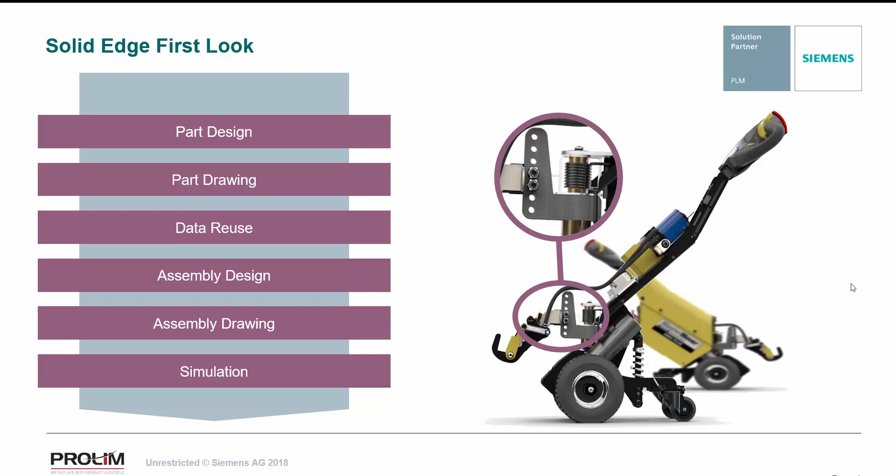First up is part design, and what I want to focus on here is something that's a real differentiator in Solid Edge, and that's synchronous technology. Now, rather than dismissing this just as some sort of buzzword, let me introduce why Siemens created it. The most common type of CAD system available in the marketplace uses what's called history-based modeling because it has many great benefits, such as being dimension-driven. It's so good, in fact, that Solid Edge has been a history-based modeler for about 20 years now and continues to provide this method today. However, we've worked this way for so long that we've learned to ignore some of the not-so-good things, such as having to pre-plan the model.

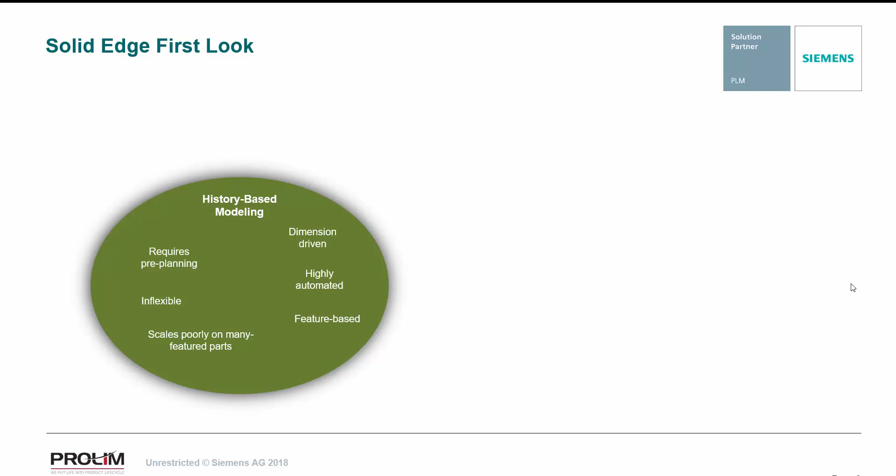Looking for a better way to work, we can turn to direct modeling because this has some great benefits such as direct interaction with the model, but there are downsides to this method as well, such as being featureless, so not very organized. So how about taking the best of both worlds, but leaving out the downsides? Well, this is why Siemens created synchronous technology, with unique items such as 3D driving dimensions and face relationships to really synchronize those worlds. In fact, the technology is so unique to Siemens that the last time I checked, there are about 8 patents granted, with a further 23 pending. Obviously, it's much more exciting to see this in action, so let's do just that.

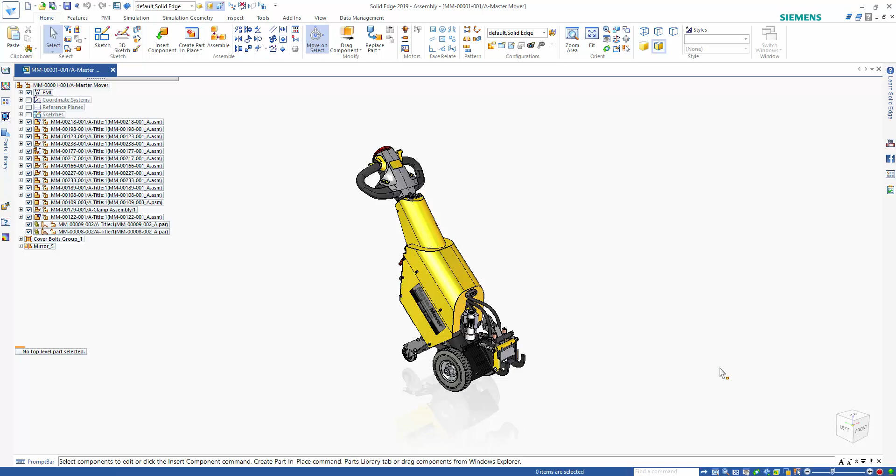So here we see the Master Mover assembly, and we're going to start by designing our part using a top-down modeling approach. To do that, we're going to narrow down the parts that we can see here using a display configuration, and we're going to edit into one of these sub-assemblies so that we can design the part in the context of that assembly. What we're going to do is simply define where we want to start that component by using some of the existing geometry from the components in the subassembly.

And then using the Solid Edge data management, we can come in and automatically assign things like a document number to the new part file. We can also go in and browse and choose where we want to save this part, in our case out to our working directory. We can add other relevant information, things like titles or notes or whatever else we might need. Simply hit save, and now we've started our new part file.

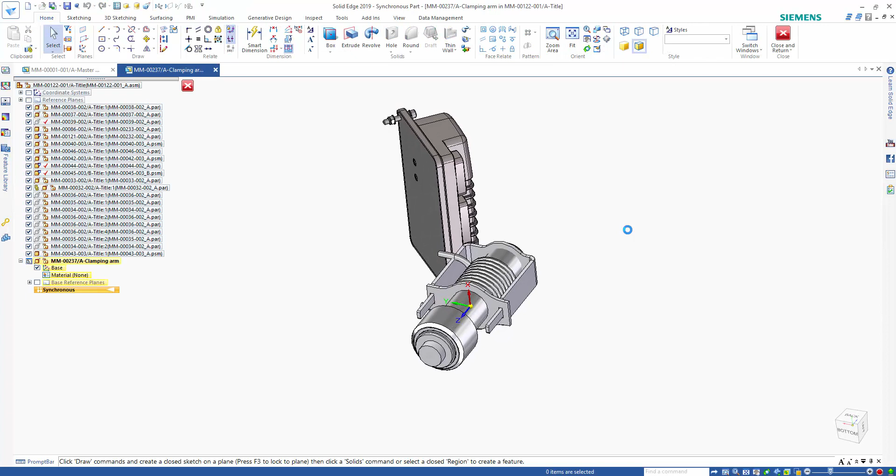Again, we're designing this in the context of the assembly, so to start to create some of our features, we're simply going to reuse geometry from the surrounding or adjacent components. In this case, we'll reuse this face geometry here and simply extrude that out, and now we've got our part started. We didn't have to go in and create any sort of sketches to begin with, anything like that.

We just go do it and start to create the geometry. Next thing what we might want to do is start to maybe cut away some of the geometry. Again, I'm just going to start directly interacting with the model using synchronous and our steering wheel to push those faces through the model to create a cutout. Also, if we maybe want to add some geometry, we can select a face here, pull that face away from the model, and key in a specific distance if we need to.

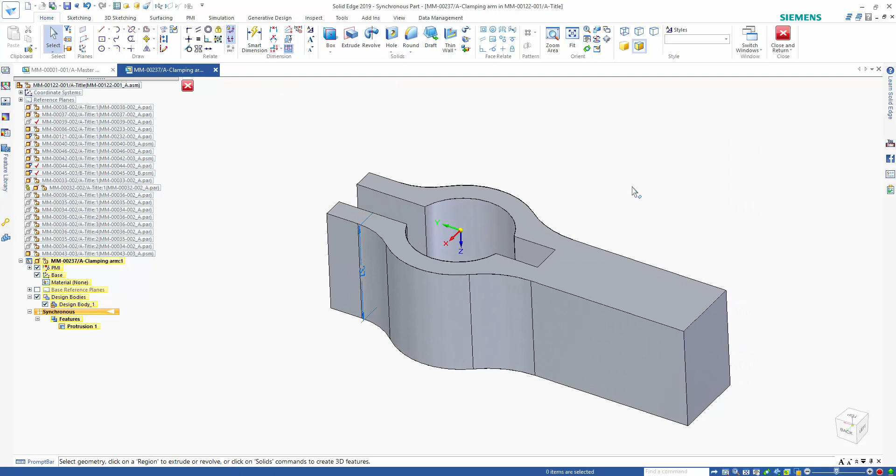We also have the capability, if we do want to sketch something, I can come in here and maybe simply just draw a line somewhere across the top of this face, which divides that face into separate regions that I can come in and select, and then simply push or pull, and based on the direction I move my cursor, Solid Edge will automatically add or remove that geometry for me.

I want to go up a set distance here, and I don't actually have to type this calculation outside of Solid Edge. I can do it right here in the value box, something like 150 millimeters minus that existing 37 millimeters of geometry we already have to end up with our part here.

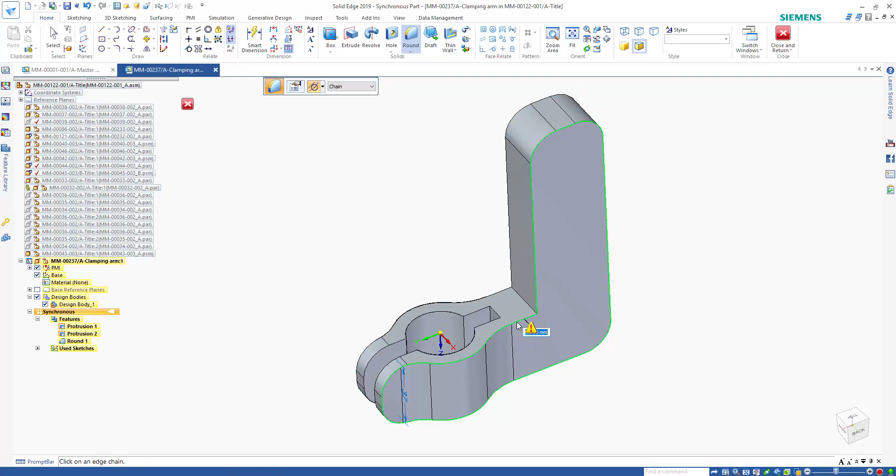Next thing we want to do is add some round features to some of the edges on the model to start to kind of finish this off a little bit. Notice how powerful this is. We can simply add the rounded features through the model, and we have a lot of other options that we can go through here to quickly add rounds to the other faces, and just like that, we've rounded off the model.

Next, what we'll do is directly interact with the model to add some constraints and dimensions to it. I don't have to go back to any sort of sketch or anything like that. I can come in here and directly interact with the model, add this dimension onto it, and actually drive the model. This is one of the benefits of that direct modeling comparison that we saw earlier, is being able to directly interact with the geometry.

So here I can add this dimension and then drive it just by scrolling my scroll wheel up and down to change that value to whatever we want. In our case, maybe we want to set it to around 45 millimeters, and then we can fully lock down that dimension so that it doesn't change on its own. We do have to go back in and change it if we want the value to be different.

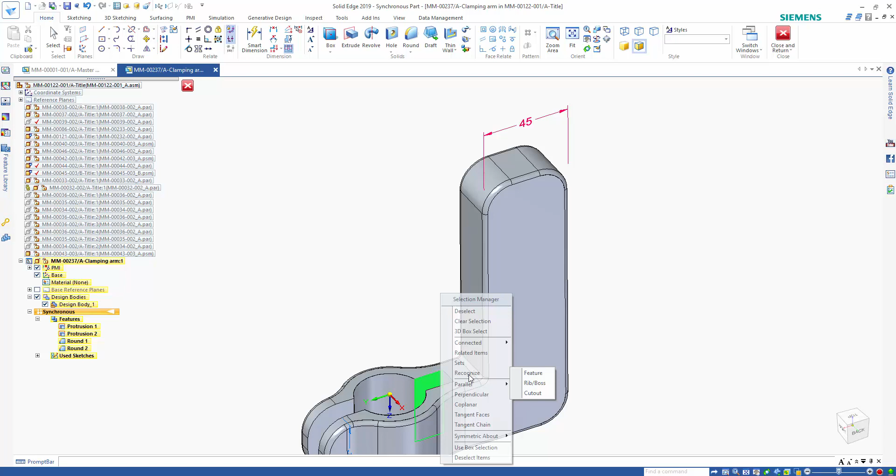Other things we can do, we can actually recognize features that don't truly exist in the history tree in the Pathfinder. I can come in and do things like recognize features or ribs or bosses or cutouts. And the great thing about this selection manager option that I'm showing you here is it also works on imported type geometry. So I could bring in a part from another CAD package, recognize some of the features on there, and then delete them or edit them or move them, whatever you need to do.

In our case, we're going to recognize this cutout, and we're going to actually copy that geometry and use it over again to create a cutout somewhere else in the model. We're going to do this by using the steering wheel and simply hold down Control to make a copy. We'll rotate that around about 180 degrees, and now we have a cutout through the other side of the model here. If we need to make any sort of adjustments, we can.

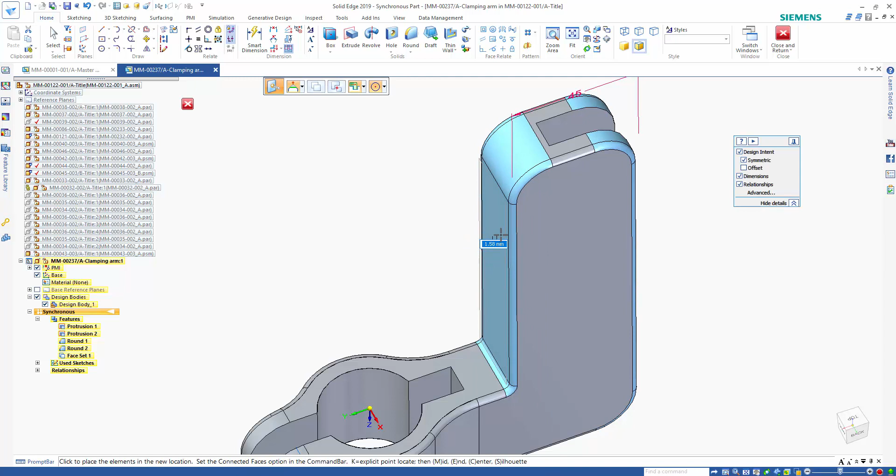Maybe we want to shorten that up a little bit. I can simply grab a face, and again, using the steering wheel, push or pull that to move the geometry. We also have options where we can add relationships to the geometry as well. Similar to how you would add a sketching relationship to your 2D geometry, we can add relationships here directly onto the 3D geometry. In this case, we want to offset those two faces a set distance away from each other. That way, if we come in and move one of the faces like this, they stay a set distance away, and this whole feature moves as one piece of geometry.

To continue on with our model here, we're going to add some dimensions to it. So we'll go back in and use our Smart Dimension tool here to add things like radius values or diameters. This diameter value, we want to round it off exactly to 34 millimeters, so easy enough to type that in. We can also go back in and change our dimension to add tolerances, class fits, make it a reference dimension, any of that type of information that we need pretty quickly and easily. In this case, we'll just add a couple tolerance dimensions to that.

Continuing on with our smart dimension, we can dimension off the center point of our round in the middle of the part to the end of the model. Easily again push or pull that value to make a change. In our case, we're going to go about 40, and we'll do the same thing to the right side of our model, and drive that value out to 34.

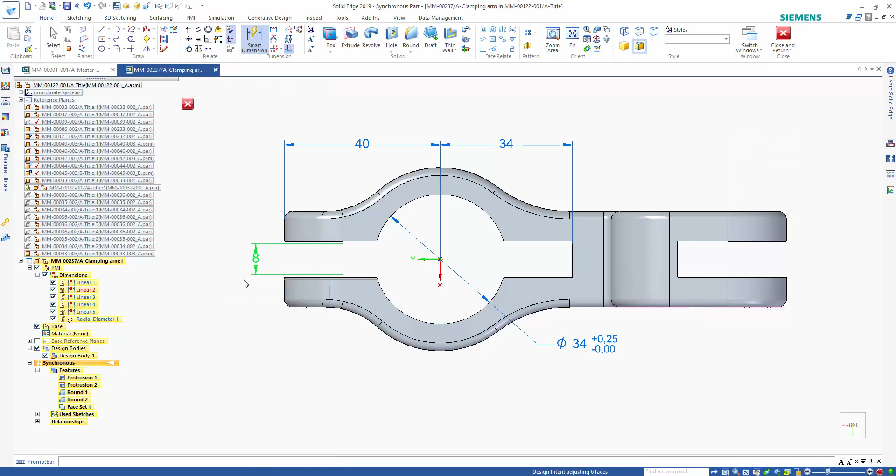Last thing I want to do with the dimensions is dimension the width of our part. So the cool thing about this, you notice when I start to drive this, is the design intent is automatically figured out here. What our original goal was to maintain the width of the cutout all the way through the model. And Solid Edge did that for us automatically. I didn't have to add any sort of relationships or information into a sketch to get this to work. I simply added one dimension, and Solid Edge figured out that all the faces are coplanar and symmetric and should move together. I can simply key in the value that I want, and Solid Edge does the rest for me.

We're going to add some mounting holes to the part as well. So we'll go up and run our hole command. The great thing about the hole command is all the wonderful options that we have here inside of the options dialog. We can go in and create basically any sort of hole that you would need: simple, threaded, counterbore, countersink. And with each subtype of these holes we also have all the different standards. So I can create any sort of counterbore ANSI or ISO hole that I would need. All of these are standard, but if you do need to make any sort of changes, you can easily come in here, customize any of the values, dimensions, thread sizes, whatever you need to do.

I already have a hole set up ahead of time here, just a simple M10 through clearance hole that we'll create down here in the bottom right hand corner of the part. Since I already have the hole selected, I can easily start our pattern command then and create a rectangular pattern up here through the model. We'll go ahead and just switch that option over so we can evenly space those holes out 20 millimeters away from each other.

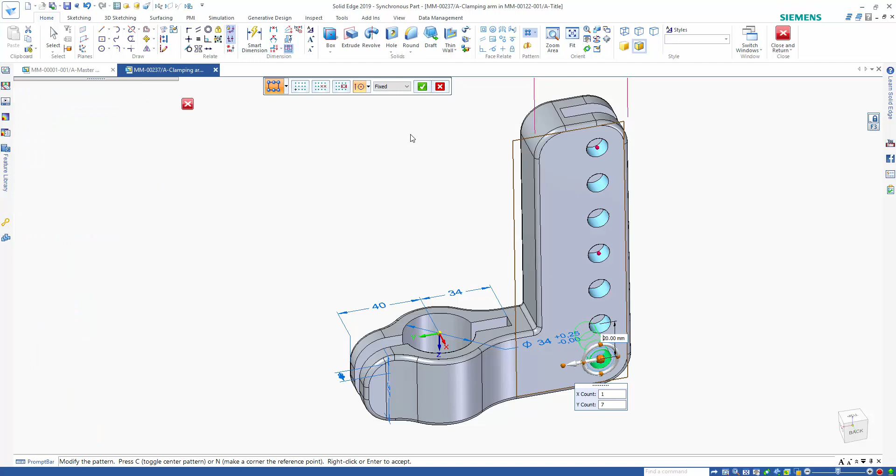Last thing we want to do here to actually edit the model is make sort of a drastic change. And if you're in a history-based or ordered environment, this would be pretty difficult to do. In synchronous, simple enough as just coming in here and fence selecting the geometry we want to edit, placing the steering wheel in an appropriate location to make this sort of edit. In our case, we want to rotate and change the angle.

So I want to place it in the center point of the hole, and just like this, I can easily rotate and change the angle of the right half of our part here. And again, imagine going back in and trying to edit the sketches for this feature, for the holes and the patterns and so on, and how much work that might take to make this sort of edit. Synchronous, couple clicks and I'm done.

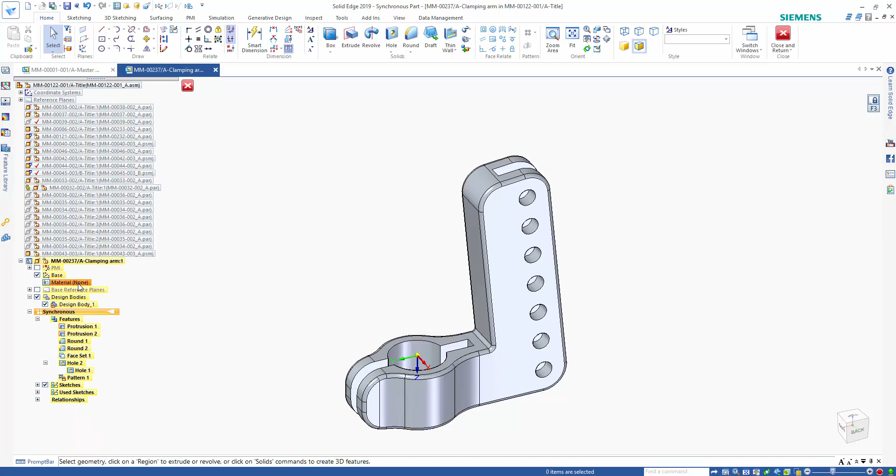So now that we have our design almost finalized, we can go in and start to apply things like material. So I can go into our material table here and I can browse out. We have a large library of provided materials, but you can easily go in and add your own, customize them to your needs. You can go in here and add any sort of properties that you want, anything for simulation, things like yield stress, specific heat, whatever applies to your materials and your models that you're creating. In this case, we're just going to grab an aluminum material here and apply it to the model.

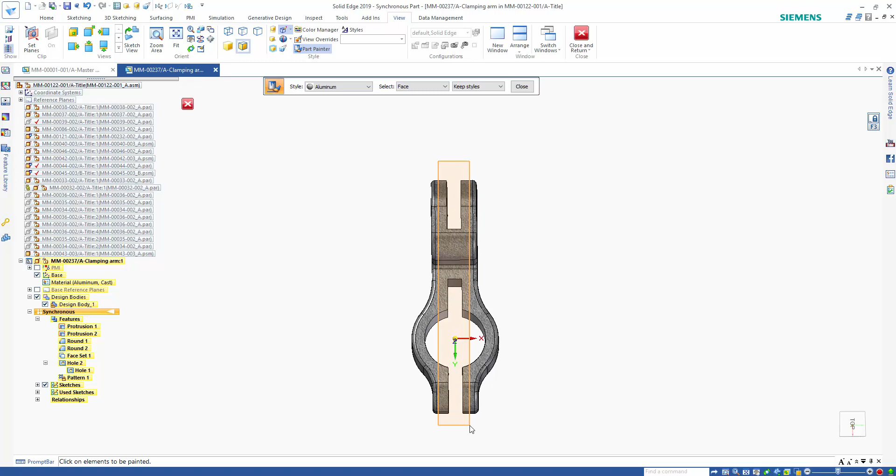And then if we need to, maybe we want to represent some of the faces as a machined face instead of the cast material look. So I'm going to come in here and paint some of these with just an aluminum texture so that it's a nice shiny machine finish instead of that cast look that all the other faces have. We can either select individual faces, or Solid Edge will also recognize features such as our hole, or we can come in here and select our pattern to paint that off as well.

So what we just saw there was how synchronous technology can drive the model with dimensions, and more importantly that there are 3D dimensions directly on the model. Models also scale well, as in they don't get slower the larger they get, an issue with history-based modelers. In addition, synchronous technology does provide a list of features for easy edits and organization, but not a fragile, interlinked web like you get in a history-based modeler.

Synchronous technology will automatically maintain the inherent design intent of the model, but allows us to change our intent on the fly. We saw that we can also directly interact with the model by pushing and pulling faces. This also makes editing synchronous models very flexible, allowing you to have those light bulb moments and make changes at any time without your CAD system limiting you.

To summarize, we saw the best of both worlds modeling, the best of history-based and direct modeling methods, that's synchronous technology. The robust engine behind all of this is Parasolid. This is so good, in fact, that it's used by many other CAD systems on the market. However, what you might not know is that it's owned by Siemens. But we keep the best bits for our own products. Synchronous technology is exclusive to Siemens software.

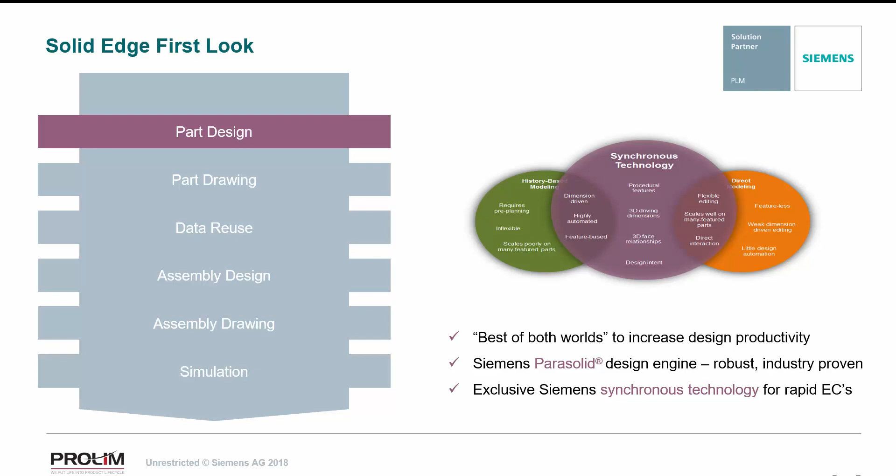Next up is creating a drawing of the part. We'll add a variety of views to clearly communicate our design, retrieve some dimensions directly from the model, and finally add further dimensions and annotations to get it production ready. We can go ahead and save our part first, and then what we're going to do is take the part over into what's known as a quick sheet template.

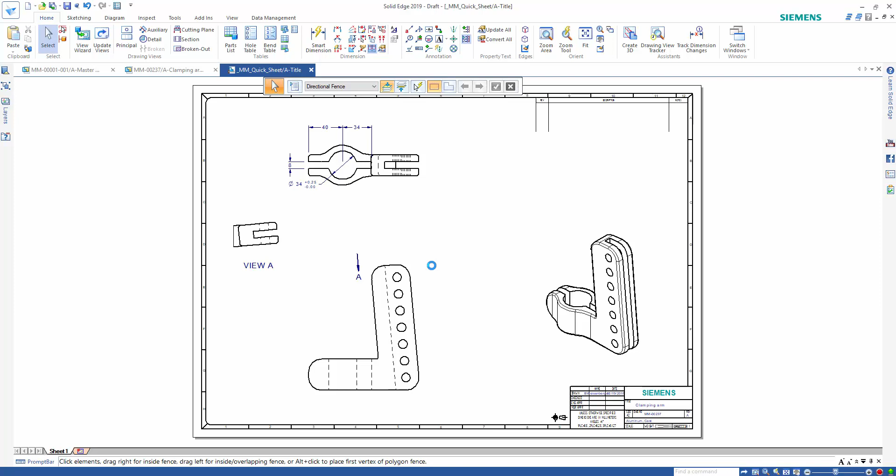What this quick sheet template allows us to do is take any existing part file, bring that into a drafting template, and quickly communicate some different views here that are set up ahead of time. Again, any part file could be brought in and we would get something like a front view, isometric view. We can see an auxiliary view on the side here, and also automatically retrieve some of that manufacturing information that we need. Since we spent the time placing these dimensions on the part file, why waste time recreating those here in the drawing when we can easily retrieve them and bring them over?

If we need to, we can come in here and add some more annotations and information. Things like center marks can quickly be communicated on the model. If we need to add center marks, maybe at an offset angle, we can also go in and use something called a dimension axis to select multiple holes and again, maybe slightly change the alignment if they're not perfectly vertical.

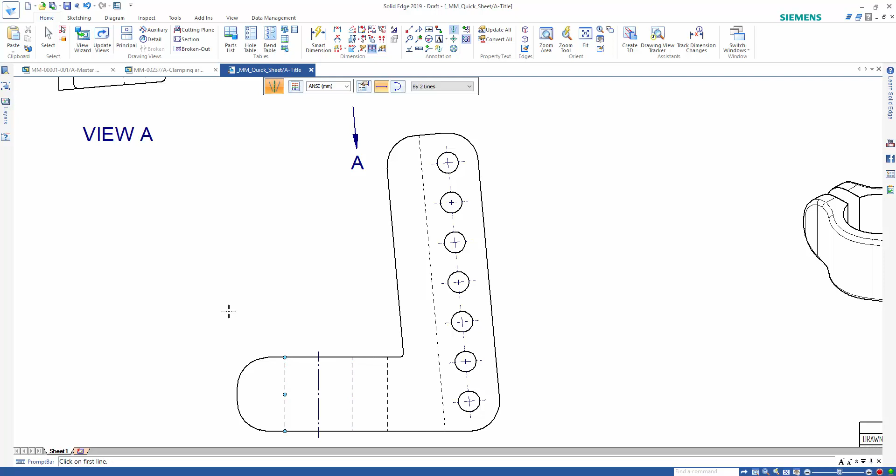We can also add things like center lines a couple different ways. In our case, we'll do by two lines. Quickly select these two lines here to place a center line. Maybe we want to add one to the auxiliary view as well. Now the nice thing about the center lines is they are associative to the views, so that if the views change or the geometry changes, the center line will update and change as well.

If we come back down here to the front view, we can add some more information, add some dimensions here at the drafting level if we need to as well. Using the Smart Dimension command, we can go in and add things like radius values pretty easily. We can select an individual line to get a length, or we can select multiple lines and get a distance. Also, if we select multiple lines and hit A on the keyboard, we can get an angle measurement.

These same dimensions can also be communicated over on something like an isometric view, if that's easier for the shop floor, for instance, to manufacture this model in. Another dimensioning tool that we have is distance between. This is really useful to create stacked or chained dimensions. So I can simply go on and select multiple elements. To get those stacked or chained, there'll be an alignment set together that I can easily adjust and move both dimensions just by dragging one of them.

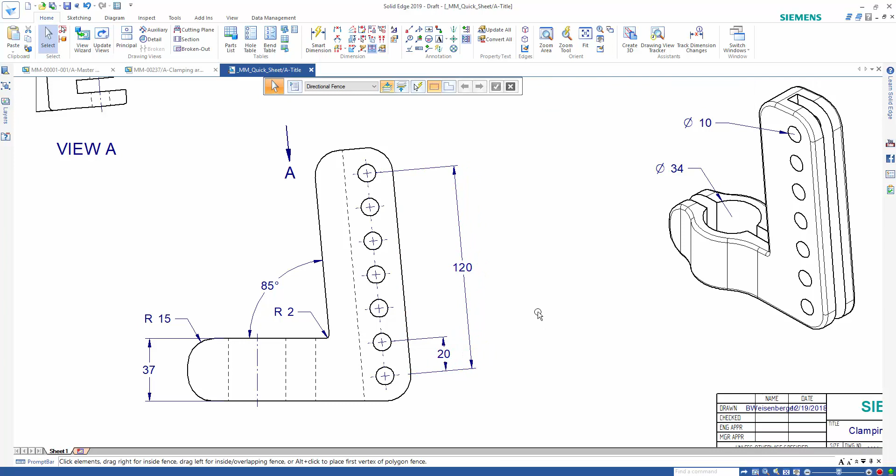Other types of annotations that we can create are things like callouts. In this case, we're going to add a hole callout, which will automatically pull specific information from the different types of holes that you attach that callout to. In this case, just a simple hole, and it gives us the through information there.

Some of the other GD&T type operations that we can apply to our model, things like feature control frames, or if we need to, we can also add datums to the model, and we can add a datum down here to a flat edge, datum A, or we can come up here and if we need to, create a datum B and add that even to a rounded or a cylindrical type edge.

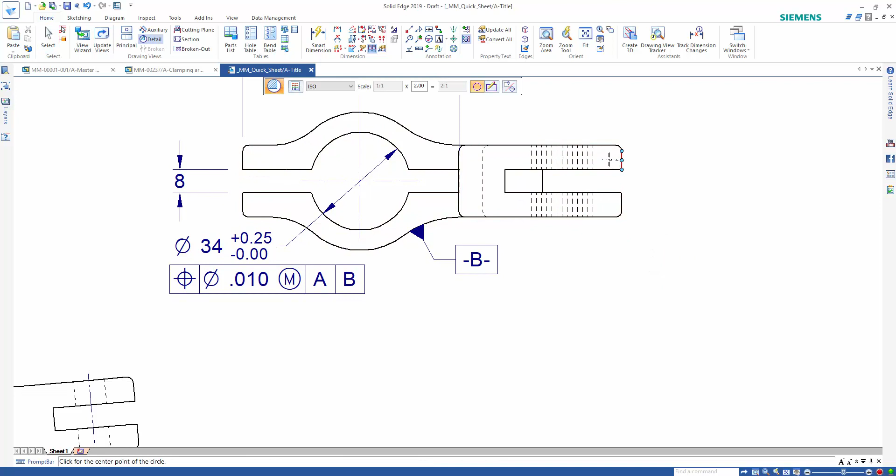We can also add other types of views such as detail views. These are simple to apply to your model. The scale can easily be adjusted here separately from any of the other views on your drawing. Here we have a detail view, obviously, that we can then, if we need to, drag around and place at a different location, which is kind of fun to do, see that live update of moving that detail view around. And of course, you have the capability to go in and add dimensions to the detail view as well without worrying about the scaling factor messing up the true size of those dimensions.

Finally, what we want to do is add a broken out section view to this model as well. This is kind of a unique, cool operation that we can do here. I can come in on one of our specific views to create a profile that I want to create for my section view here, my broken out view. And then using any of the other views on my sheet, I can choose how far through the model I want to cut that broken out section view, and then simply apply it to something like the isometric view here, again, to communicate some more information inside of our model.

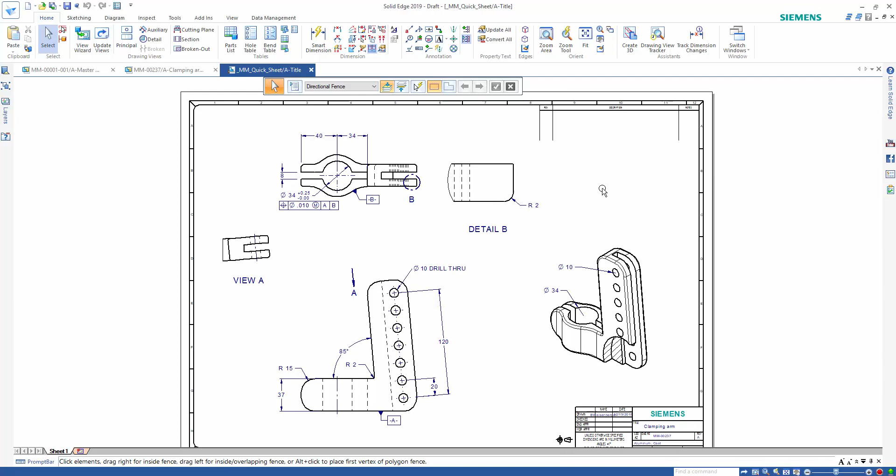The last thing we want to do then is make sure we save the drawing as well. So if we go up and hit save, our data management that we have here will automatically assign the document number and revision matching that of the part file that the drawing is created from. We can validate that to make sure that we have no issues with it, and then simply hit save.

So to summarize, we saw fast view creation, automated production ready dimensions direct from our 3D part with the ability to create further annotations tweaked to our requirements. And all of this is clear and accurate to the standards that we choose in Solid Edge, for example, ISO, ANSI, etc.

Next thing we're going to look at is some data reuse. We're going to open up an existing DWG drawing inside of Solid Edge. We'll create a 3D model from that 2D geometry. We're also going to then edit that geometry to ensure that it fits inside of our assembly with our existing Solid Edge components. So let's take a look.

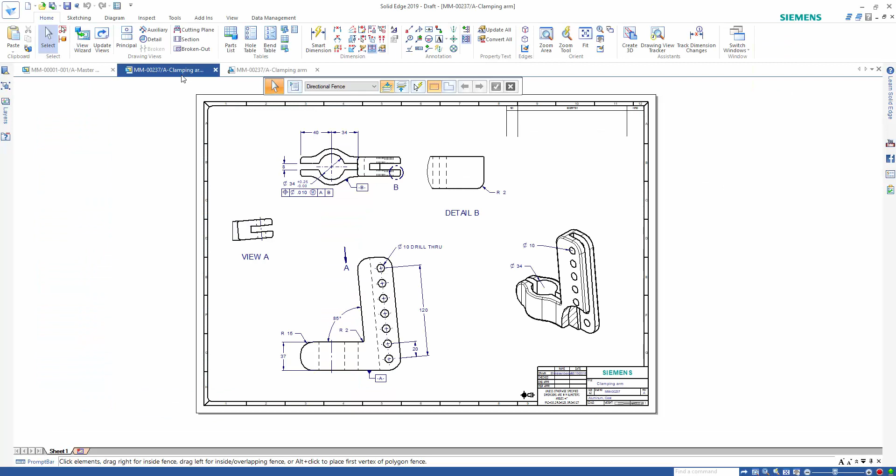To start with, we can switch back over to our subassembly where we created our part file and go ahead and close out of that part and head back to the subassembly. Now we can notice here at the subassembly level that we're missing a component here to hold this top part in place. We actually have that part though created as a DWG that we may have used in the past. We want to reuse that geometry so we don't have to waste time redesigning a new part file. So what we'll do in this case is go up and open the DWG.

To find that, we're going to use our data management here to search for a file. We can search on all different types of properties and criteria. In our case, we're going to search for a specific file type. We're going to look for a DWG file. We can easily search that and we return the result down here of a DWG. I can easily double click that then to open it, and I'm just going to choose an ISO draft template here to pull that up inside of.

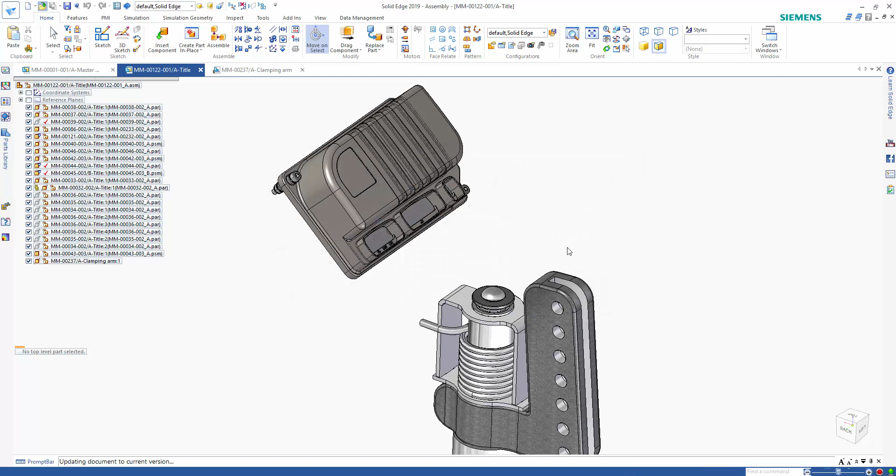When we open up our DWG files, obviously we can see the border and all of our views and our dimensions. So what we actually do is support layers coming from AutoCAD into Solid Edge. If we need to, we can come over and do things like hide some of the layers. We can also set up how we want fonts and colors to transition from the DWG into Solid Edge and how we want those mapped across.

Now what we're going to do to get this into 3D is run a command called Create 3D. We'll simply choose the part file we want to add the geometry to, select our front view and our right view. You do have the option to select as many views as you want.

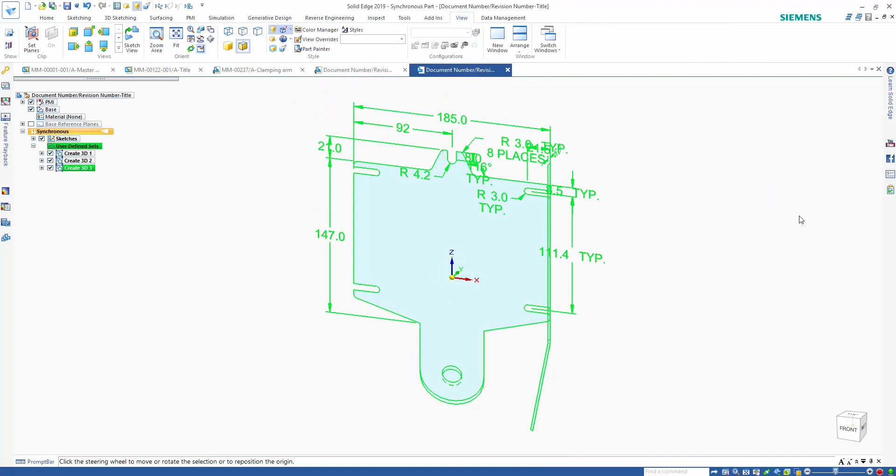In our case, we're going to set a fold line where we'll fold these two views on top of each other. When we hit finish, you'll see what I mean. Our two views are brought into a part file folded on top of one another. All of our dimensions came across as well. Right now they're green dimensions because they're not really attached to any sort of 3D geometry, but as we start to create a part here, you'll notice those dimensions will become attached.

Now, the great thing about bringing these sketches into the synchronous environment is I don't have to know how far something's extruded. I can simply select one of my sketches and grab a key point on one of the other sketches. Again, you'll notice some of the dimensions start to turn blue, which means they're attaching to the 3D geometry. I can go in with my extrude command and select even an open profile here and start to extrude that out or cut that through the model if I want to continue with our part here.

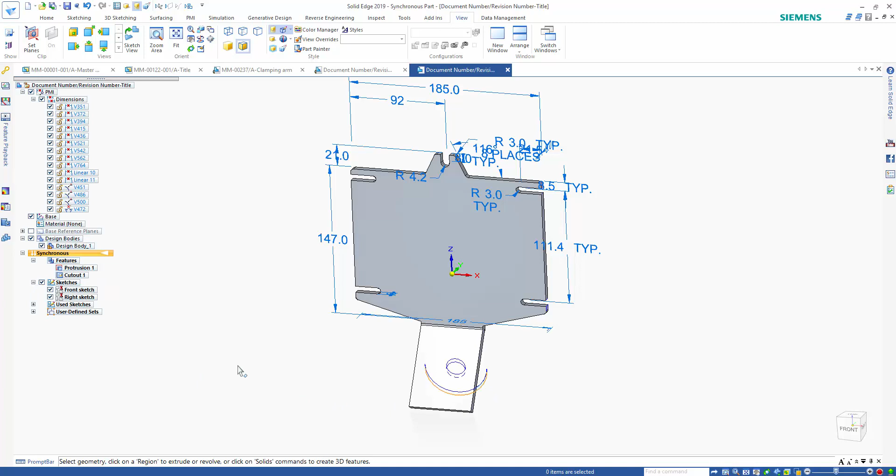Now, just to go along with this, there are some additional sketches at the bottom, but we don't necessarily need those. We can actually come in and delete all the sketches from the model and just go in and add some of our own features to finish this off. In our case, what we'll add are a couple round features down here on the bottom of the model. We'll add a couple 30mm rounds down here. We can also use some of our primitive shape commands like the cylinder command to create a cylindrical cutout without really having to create a sketch that's going to drive this. Just create a cutout through the model.

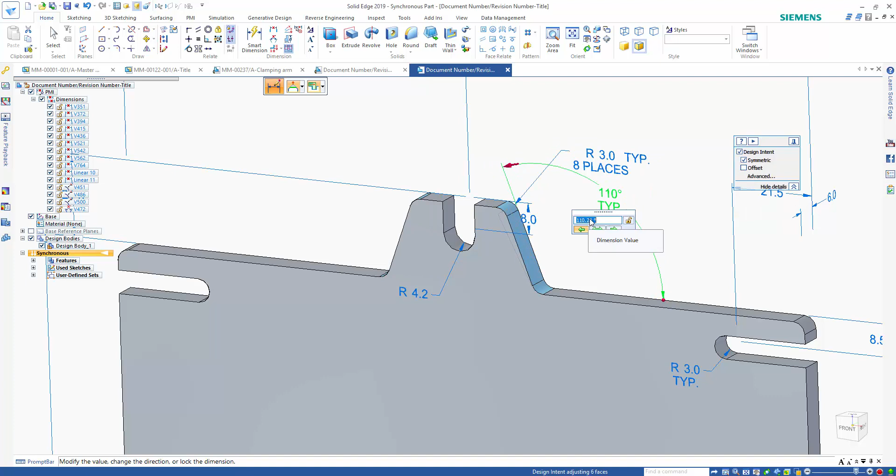Now, I talked about some of the dimensions attaching to the 3D model. Well, let's look at what happens if we make a change to one of those dimensions. I can select one of them and start to drive them using my scroll wheel up or down if I want to make a change, or I could select even an angle dimension here and symmetrically adjust that because of design intent, picking up both sides of the model. So all of that was automatically created for us when we brought those drawing views from the 2D over into the 3D.

Now we want to go ahead and apply material to the model, so I can simply right click here and maybe we just add steel to this for right now. And this looks a lot like a sheet metal part here. But all we see in our Pathfinder right now are part features and we're in the part environment. So we actually want to make this sheet metal, which is easy to do inside of Solid Edge. I can simply switch into the sheet metal environment and use one of our tools to transition the model from a part model to sheet metal. If you look at the Pathfinder, you watch our protrusions turn into a tab and a flange.

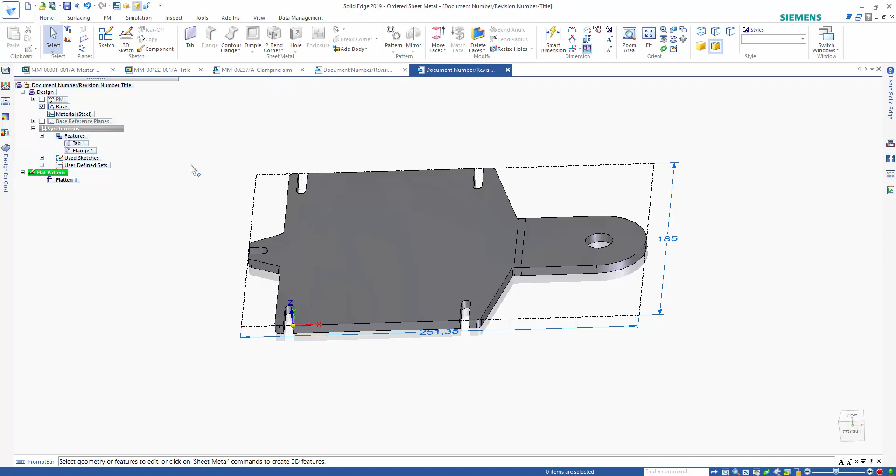And just to do a couple things to prove to you that this is sheet metal, I can select our bend and actually edit the bend radius. Maybe we make that 6mm instead of 3, or I could actually flatten this model, select the face I want to have oriented up in my flat pattern, and we end up with the flat of the model, which also shows us our cut size, sheet size that we need to create this. So pretty quick and easy to convert this from 2D to a part to a sheet metal document.

Now, what I'm going to do is go ahead and actually save this model. Again, our built-in data management will allow us to automatically assign a document number to it. We're going to save this in our working folder. All we have to do is just add a title to the file and then save it.

Something new that was added here in the latest version of Solid Edge is an option to apply costs to sheet metal files. So we have a design for cost module that's included with Solid Edge that allows us to come in here and calculate things like the number of bends, cut lengths, stamping features, and associate a cost with each one of those operations.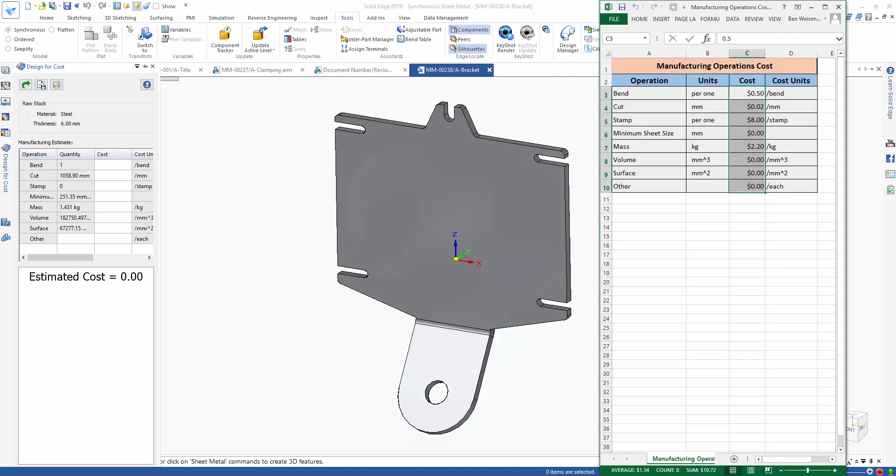In our case, we have an Excel sheet set up for us already that maybe was provided to us by sales or some other engineers that know how much our operations cost. So what we can do is actually copy out those costs here and paste them inside of Solid Edge, and we get a cost estimate of how much it'll cost to create this part file. So we see a rough estimate about $24, $25 to create this.

We're going to come back and look at this cost in just a little bit once we make some more changes to the part. But for now, let's go ahead and close out of the part file to see how it actually fits and functions inside of our subassembly. So we can close down the part and the drawing. We don't need that anymore. We'll head back over to the subassembly and we're going to insert that component. We can go grab it from our library.

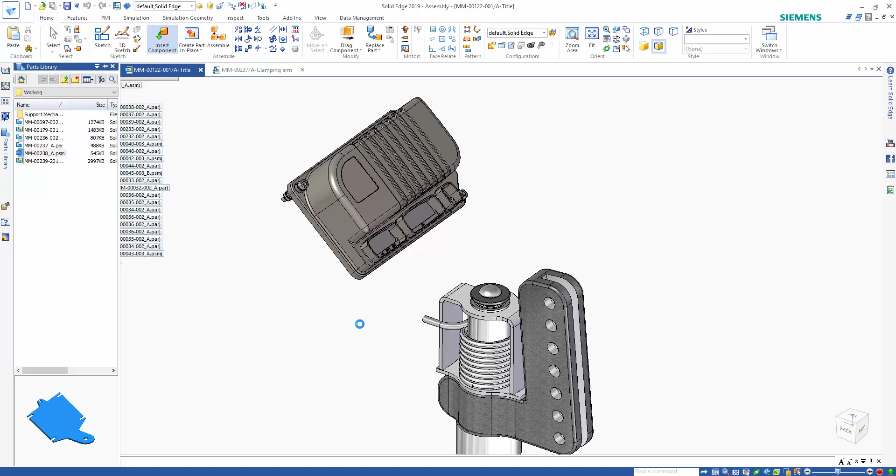If we need to, we can use the preview to reorient it to get it closer to how we want to bring it into the assembly. Simply drag and drop and add some assembly relationships. The default part positioning tool here is our flash fit tool. Makes it really easy to grab any flat planar surfaces or cylindrical surfaces and automatically apply things like mates and axial aligns. Just like that, we've got our part positioned and we can obviously see it doesn't quite match up.

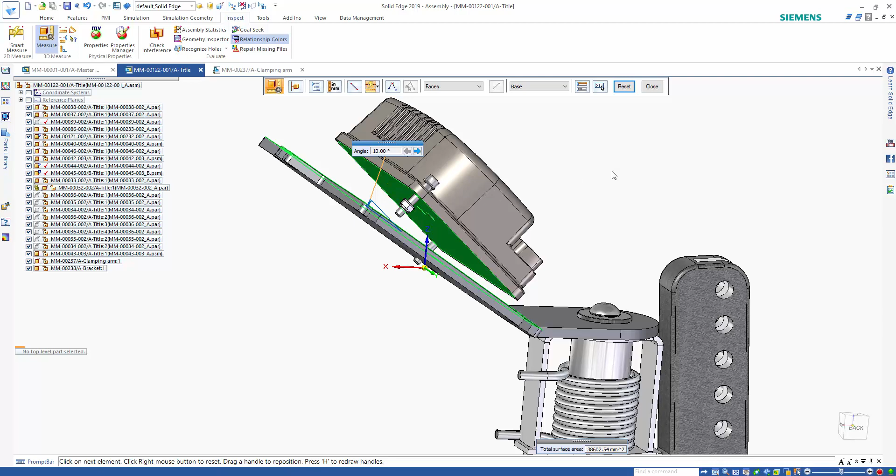Our angle is not correct. Some of our slots don't match up with the bolts or screws and our other components, so we need to make some changes. First thing we want to do is measure the angle between these two parts so we know how much we need to edit the part by. So I can go in under our Inspect tab and take a measurement here between these two faces, and we can see that returns an angle of 10 degrees. So we need to rotate our sheet metal part 10 degrees up.

So what I can do is actually just select that part and do an edit in place here, edit it in the context of the assembly. And what I'm going to do is simply fence select the faces that I need to drag or rotate or edit, and place my steering wheel in an appropriate location then to make this rotation. So that's the power of synchronous, simply just being able to grab the things I want to change, place the steering wheel in an appropriate location, and then simply start to rotate that and make my change. So I'm going to rotate that up about 10 degrees.

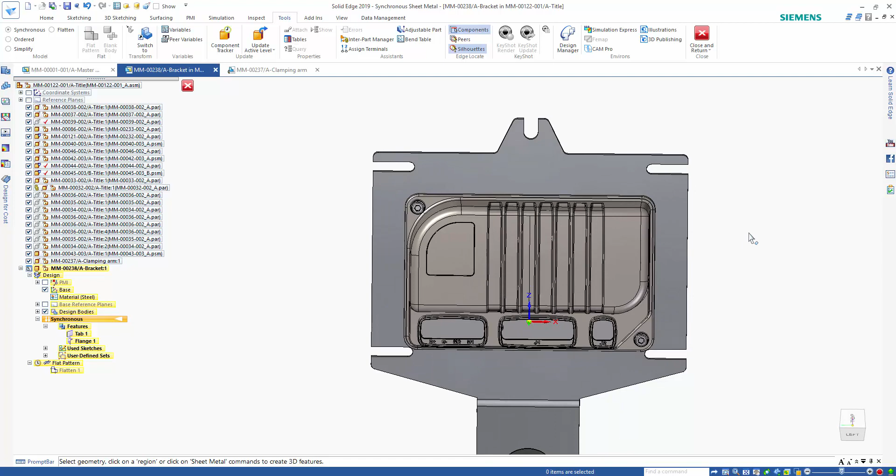And if we turn on those background components, we can see that that actually works. It matches perfectly there. So we're good to go on that edit. The other edits that we need to make are to the slot features on the side of the part. So what I can do here is, again, simply fence select the geometry I want to change, place the steering wheel in an appropriate location, and start to make an edit. You'll notice our design intent is moving all 4 slots at the same time. It's trying to keep them aligned and symmetric, which is what we want.

So in our case, I'm going to just bring that up, center it up on my bolt here, and those bottom slots are good to go. To edit the top, I'm going to fence select actually the entire part to bring the whole top surface down. We'll locate our steering wheel and again bring that geometry down, and just like that we've made those changes that we needed to get the part to fit our assembly.

So pretty cool that we can bring in a 2D AutoCAD drawing, bring it into 3D Solid Edge, make it a part file. If we decide then it should really be sheet metal, not a problem. Quickly transition that over and then make some edits on the fly at the assembly level to get this to fit into our model.

Last couple things we maybe want to do is add another feature. Maybe we need to add some strengthening features like a gusset in here. So this is a procedural feature where we can go in and add these parameters that are going to drive it, things like the depth and the width. I already have one set up ahead of time, so I'll simply select that one. And then we just choose where we want to place it. I want to drop it right here on the middle of this bend.

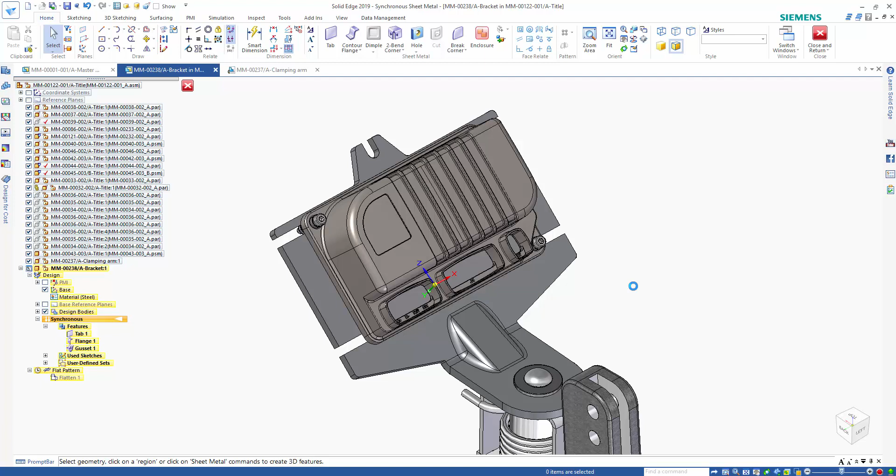So we talked about that design for cost, and we saw it was about $24, $25 before. Now we've made some changes, added some additional features. So if we take a look at our cost now, we're up to about $32, $33. So pretty cool that it'll continually update and recalculate our costs of our features as we add them into our sheet metal design here.

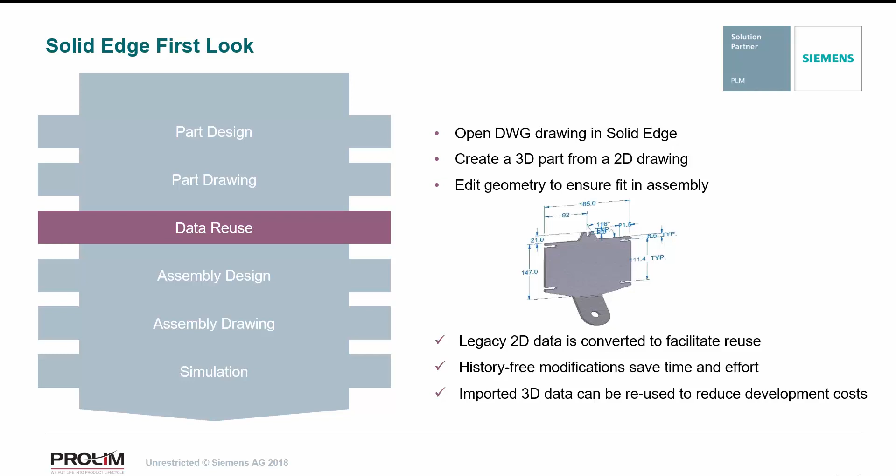So again, just to recap, we saw how we can bring in that legacy 2D data and convert it to easily reuse it. We can use synchronous and our history-free type modifications to save time and effort. We do also have the capability to import 3D data and do something similar. We can easily go in and reuse it, make changes to it as if it was designed right inside of Solid Edge to help us reduce some of our development costs.

Next thing we want to look at is some assembly design. We want to start to assemble these components that we've created with things like fasteners, nuts, and bolts. We also want to look at placing some additional components and eliminate any interference between the parts that we might have as well. So let's take a look.

So we've finished with our bracket design. We can go ahead and switch back over to our top level assembly. So we'll simply close out of the part file and that subassembly, head back over into the top level assembly here. And we're going to go in and add some assembly relationships, similar to what we did with the bracket on top there. So we'll go in through our assemble command, and again, using our flash fit option, we'll simply line up some of these holes between the components.

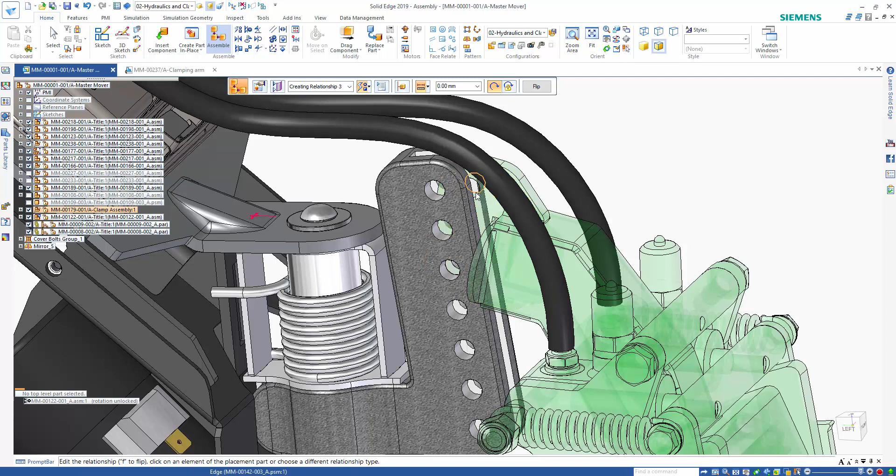And you'll notice as we start to add these relationships, the tubes on top actually adjust. They're a fixed length tube, but the path will automatically move and adjust to fit where the components are currently placed. And so pretty nice option there that you have available with adjustable components and adjustable tubes.

So we have our components assembled here. What we want to do is add some bolts or fasteners between those components to hold them together, obviously. Now, I don't want to go in and take some measurements. How deep are those holes? What are the size of the holes? So what we have is an option called the fastener system that can actually do some of that work for us automatically.

So what I'm going to do is open up the fastener system, and this is going to use our built-in standard parts database where I can go in and select individual holes or multiple holes that I want to place bolts inside of. We'll choose how far through the part we want those bolts to go, and it'll simply bring up our standard parts database.

Inside of this database, it's going to limit our options down to the specific bolts that will fit inside of these holes. So here I can see in a DIN standard, I have these specific types of bolts that will fit inside of here. This will also allow me to go browse out ANSI standard, ISO standard, whatever it may be, to again find those specific bolts that will fit in my assembly.

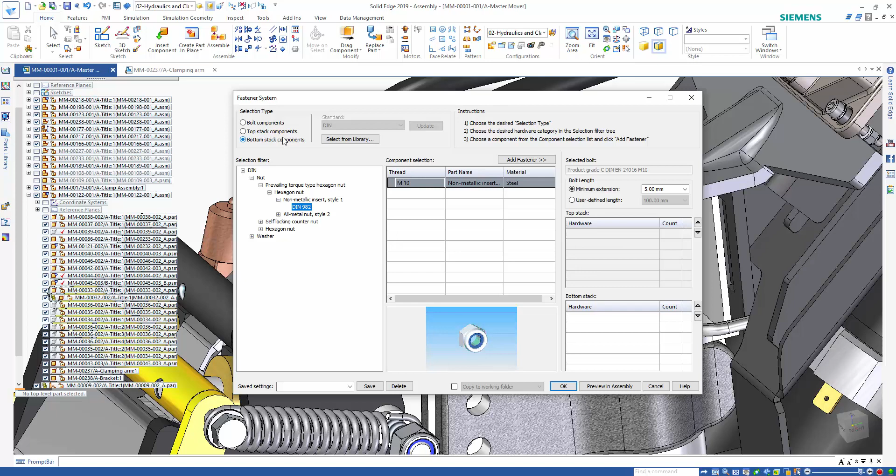Once you select a specific bolt, you also have the options to go in and pick things like top stacks if you want a washer, or bottom stacks if you want a nut, whatever you may need. I already have one created here for us and saved, so we'll just go ahead and grab that, place it inside of our assembly. And there we go, just like that, we place those two bolts with the nuts right inside of our assembly, speeding up that process for us.

Next thing we want to do is look at another one of my favorite commands in here called duplicate component. So if we switch our display configuration, we can see we have these different bolts placed inside of the assembly. What we want to do first is I want to put a washer on one of them. So I'm going to head over into my parts library, go into our working directory, and we have a washer here that I'm going to place inside of the assembly.

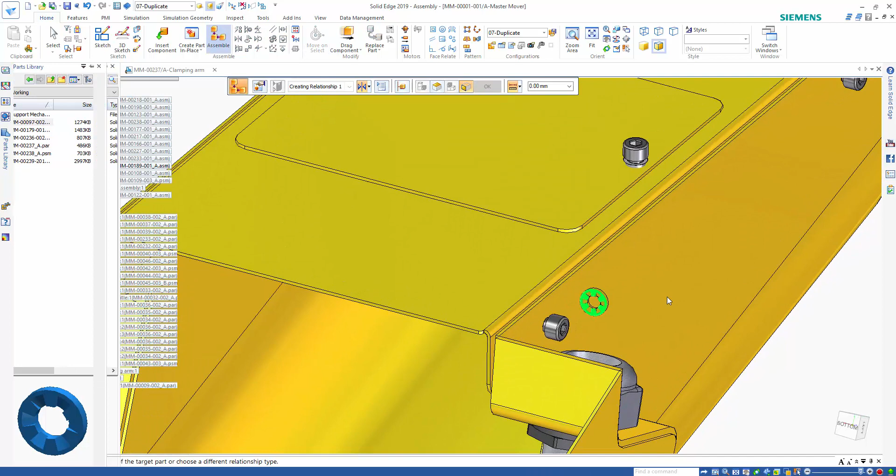Now, what you'll notice actually about this washer is one of the faces is already highlighted. This is another option that you have available inside of Solid Edge called Capture Fit, where we can tell Solid Edge to intelligently remember the relationships that have been applied to the components the first time that they were placed.

That way, in the future, if you use them again, it really speeds up the process of placing them. All I have to do is select the faces I want to align it with, and just like that, it's been placed inside of my assembly.

Now what I want to do is take that washer and add it to all of the other bolts in the assembly. So I can select my component and come up here and run the duplicate component command. It's a pattern type operation, so it lives up here in the pattern group. And what I'm going to say is I want to duplicate that washer from this bolt to any other bolt that I select. Or using this button up here on the command bar, I can say find all matching occurrences, and just like that, we've added a washer to all of these other bolts. So that's another option you have to help speed up the assembly process.

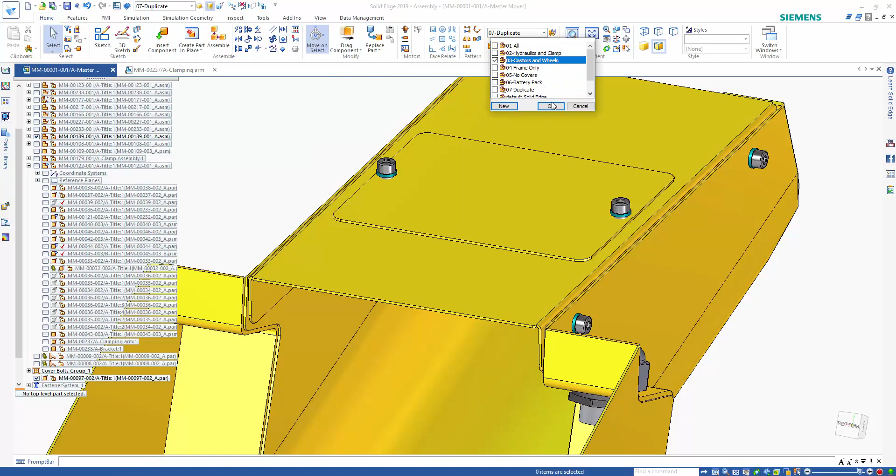Next we want to change our display configuration again, and over here in the back we can see a subassembly of a caster. We only have one placed inside of here right now. So what we're going to do is edit inside of our subassembly. We're going to simply fence select the geometry that has already been placed in here. We want to use that over again. I don't want to have to bring in all these bolts, bring in all these components one at a time. I simply just want to reuse them.

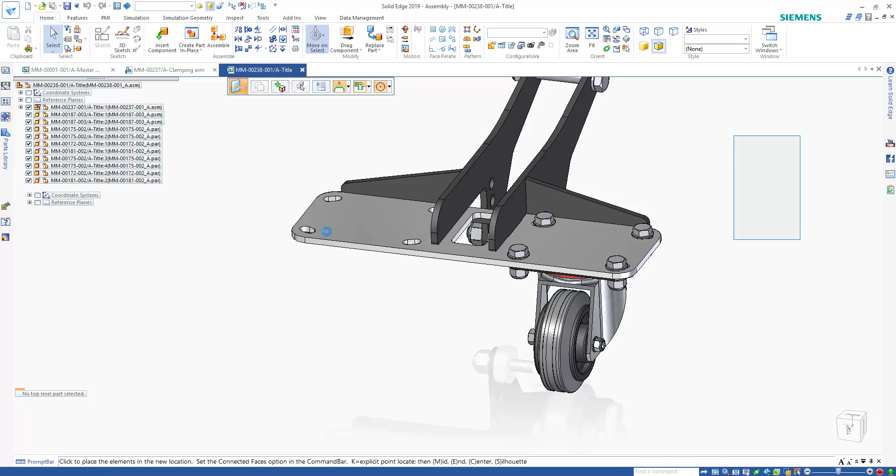So what I'm going to do is place my steering wheel somewhere specific here, maybe on the center of the bolt, and simply do a copy by holding down Control on my keyboard, select the steering wheel, and I'm going to copy those components over here to the left, and we're going to say redefine those relationships to this plate in the middle of the subassembly, and just like that, it's been copied over and we're good to go.

Just to prove to you that it did copy those assembly relationships, if I select one of those components and we look down here to the bottom of the Pathfinder, we can see that it did create those specific assembly relationships. So again, another time-saving operation that you have available to you. You can easily copy and move components to somewhere else in the assembly. So we'll go ahead and save those changes and close down that subassembly.

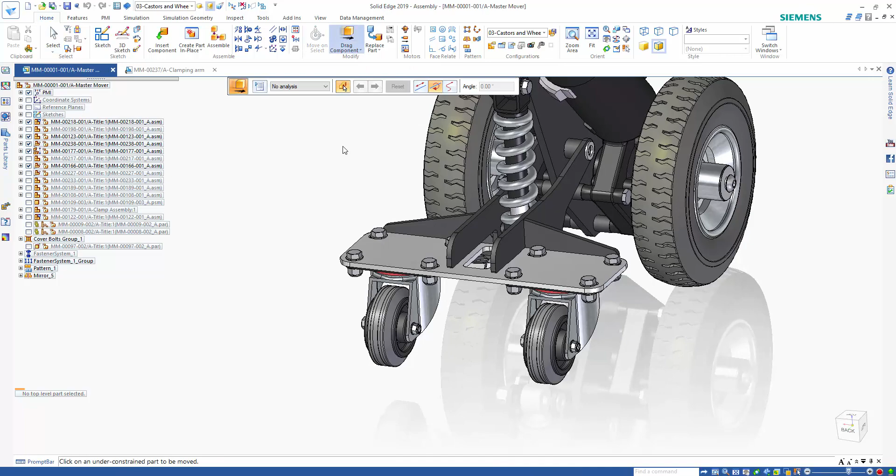Now you'll notice on this assembly we also have this spring up here, this shock. So what we can actually do is show some analysis, some movement of how this assembly will go up and down. So I can grab this component and drag it, and as I let go, you'll notice the spring automatically updates. It's an adjustable part. So as the length of that hydraulic shock changes, the length of the spring will change automatically as well.

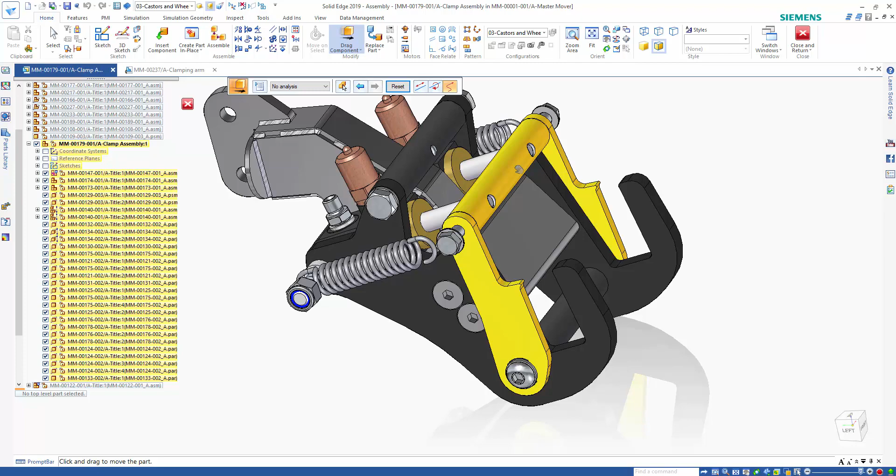We actually have another place over here in our top level assembly where we want to see something similar. So I'm going to do a show all on the entire assembly, and up here towards the front we have some similar motion that we want to take a look at. So what I'm going to do is edit inside of this subassembly. And we'll do the same thing. We'll do a drag component. We want to drag this yellow bar here off to the side. Again, you'll notice those springs update as that part moves.

Now, as we drag this all the way out, you may notice we might have a little bit of interference here between the yellow component and the black ones. So what I'm going to do is run an inspection operation here to check our interference. And I want to check the interference that this yellow part might have with any other part in the assembly. And just like that, it highlights the interference between those two parts. So we need to make a little bit of a change here to get rid of that interference.

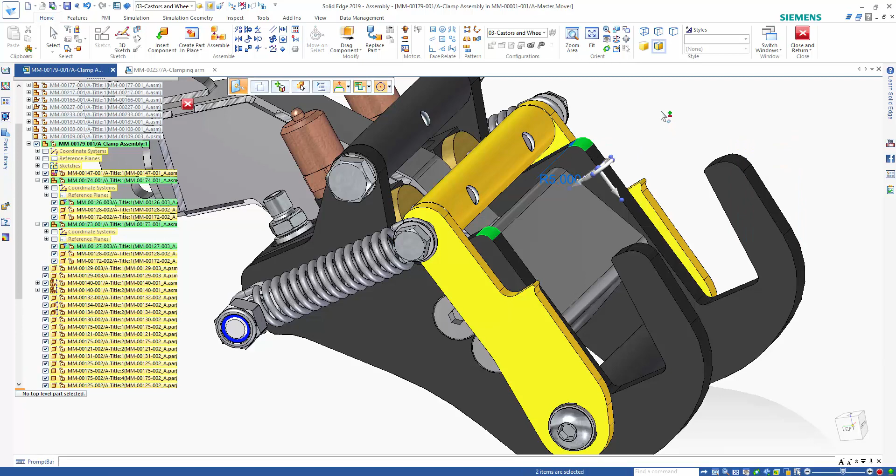To start with, I'm going to drag this component back to where it was. And then we'll simply edit these parts here in the context of the assembly. I don't have to waste time taking any sort of measurements, finding this specific part file and editing inside of it. I can simply select both of those radiuses, place my steering wheel in an appropriate location, and easily drag those faces down, maybe something like 5 millimeters. And just like that, our change has been made, interference has been taken care of. So we made our changes to our assembly, and it looks pretty good so far. So let's go ahead and save any of those changes that we've made.

So we saw some of the automated tools that we have built inside of Solid Edge to help us speed up our assembly design process. We can easily check our assembly fit and function by using things like drag component or check interference. We can also duplicate components or clone components to help rapidly speed up the process of creating our assemblies for increased productivity.

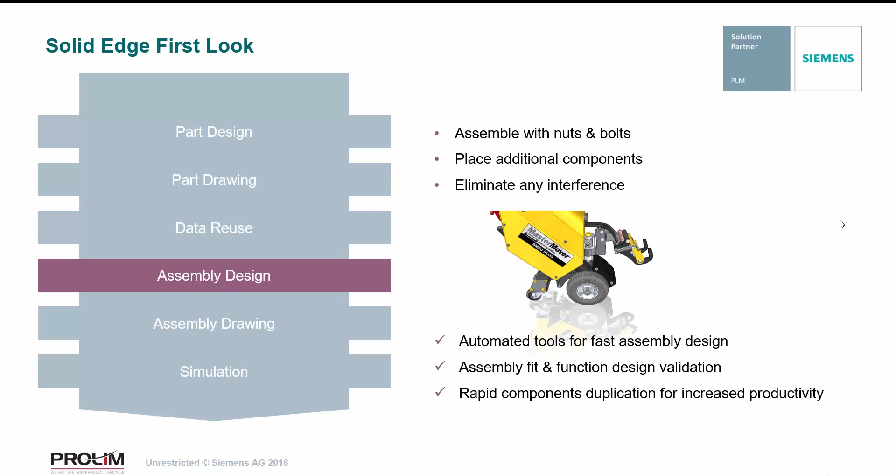Next thing we want to look at is some assembly drawing operations. We want to create maybe an assembly exploded view, also add something like a parts list with balloons, and then talk about how we can share that information with a non-Solid Edge user. So let's go ahead and take a look.

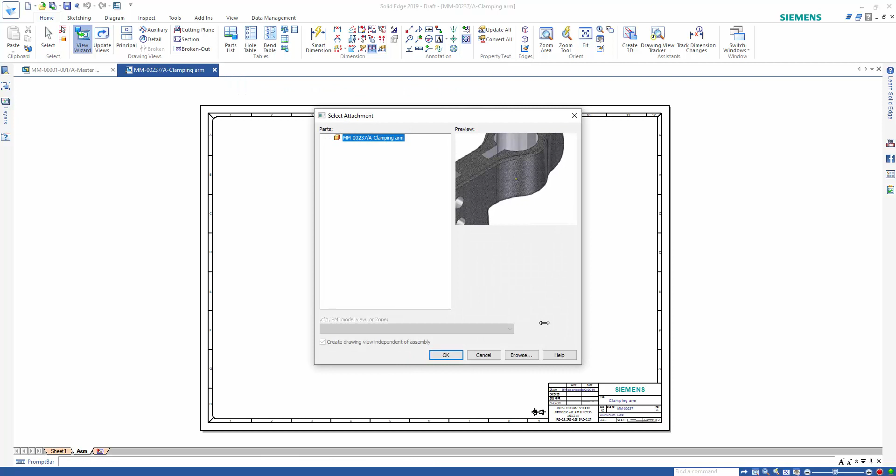So we're going to start by switching over to our drawing, and what we're going to do to begin with is add a new sheet. After we add that sheet, if we want to, we can rename it, maybe call it something like assembly, since that's the view we're going to be communicating on this sheet. We can then go up and run the view wizard. This allows us to create views from existing components already in the drawing, or we can browse out, and since we're running Solid Edge data management, we can go search that directory.

So I'm going to search for assembly documents, and instantly that'll bring back our result of a number of assemblies that are in our working directory. If needed, we can come up here and also type in some sort of a keyword to search on. So we're going to search on the word clamp. And just like that, we return our one result. We can see our subassembly that we're working on. So let's go ahead and select that, and we'll double click that to place the view inside of our assembly.

Now with this view, what we actually want to communicate is an exploded view. So I'm going to go up into our settings, change to an exploded display configuration. We can also shade this view in so it's a little bit easier to see as well, and then we'll come down and place this on our sheet.

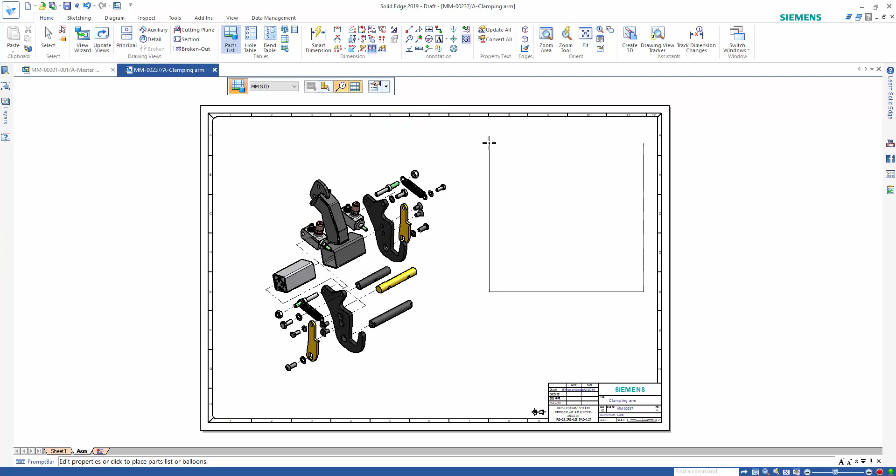Now with this view, we want to add a parts list. We want to see a bill of materials of all of the part files here. We also want to add balloons that will attach to some of the components as well. We can do this all within one command, our parts list command. We simply select the view we want to create the parts list of. We'll go in and create our parts list here just using a millimeter standard format that we set up ahead of time. Simply place that parts list onto our sheet, and there we go. We see our balloons and our bill of materials.

If we start by looking at the balloons, you'll notice they're attached to a dashed line. That's called our annotation alignment shape. That can actually be edited. We can go in and do things like change the size of that, and notice all the balloons are attached to it and will move with it. We can do a shape edit or a local edit, or if we want to, we can go in and grab the balloons and slide them along the shape, or if we need to, we can also pull the balloons off the shape. So it makes it really easy to work with and get those balloons organized on your sheets.

If we go over and take a look at the parts list itself, we can simply double click this and go in and make edits. We can go in here and select components in the parts list and get a preview of them over on the left. It'll highlight them in the drawing view as well. It makes it really easy to work with it. Again, if we want to do some edits, I can come in and maybe select some cells, make those bold, italicized, underline, whatever you may need to do.

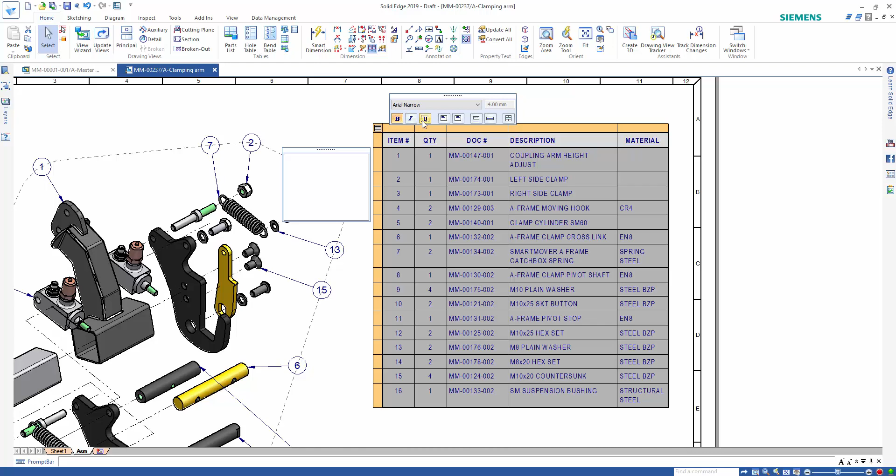So now that we have our assembly view done, we want to talk about how we can collaborate maybe with some non-Solid Edge users. So what we have is an option called the Solid Edge portal. This is available inside of Solid Edge. Running through the application button, you can go directly to the portal, or you can simply go out to the website and you can create a login here. This is free to do.

If you're a Solid Edge customer already, you'll have a WebKey account that you could use to log in, but you're free to go out and use another email to create an account as well. What we're going to start by doing is creating a project here, and this will allow us to then take any files that we want and upload them into the portal.

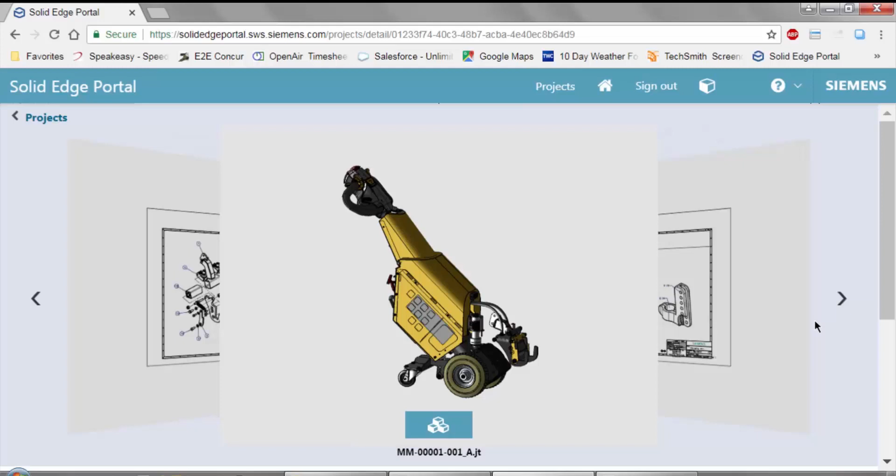So in this case, we've made a master mover project that we've uploaded some part files, assembly files, drawings, whatever it may be. We can see all the files we've uploaded, and then if we want to take a closer look at one of them, we can easily open them up. We can zoom in and out. We can see all the drawing view dimensions, annotations, anything you might have created, we can easily review here on the web in the portal.

You do have the option to go in and create markups then if you need to as well. We can do things like draw shapes. We can add text like we're doing here. Whatever you need to do, it makes it really quick and easy to create different types of callouts, or maybe there's an issue in the drawing that needs to be fixed.

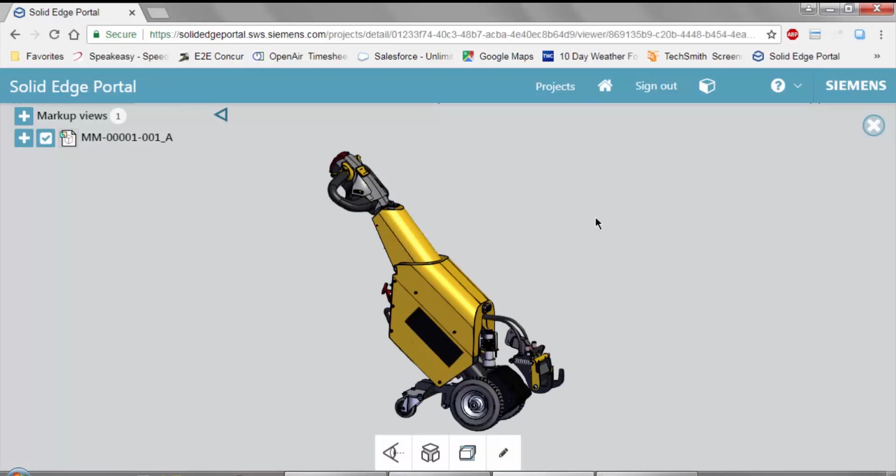These then get added over on the left in a Pathfinder that you can then go back and review anytime in the future and pull up those markups to see if that change has been made to the drawing or not. Here we can see an assembly on the portal. Really quick and easy to rotate these around. We can expand again the Pathfinder, see all of the parts and subassemblies listed over there on the left.

We can either graphically select the parts from the assembly itself, or we can go over and highlight them from the Pathfinder. That allows us to do things like zoom on just that part file or do a show only, whatever it may be. We can quickly auto-explode these subassemblies if we want to, or we could auto-explode the entire assembly, which we'll see in just a little bit.

Some other options that we have are to create things like section views. So we can create section views on the different base reference planes and drag those through the assembly wherever we may need them to be, just to take a quick look inside of the components.

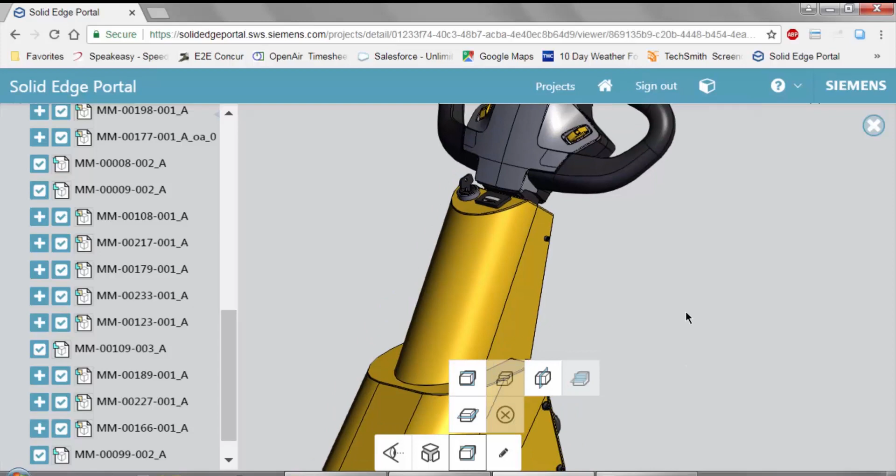If we turn back on the top level assembly, maybe we'll rotate around and we want to focus on this back area over here. And similar to what we did in the drawing, we may want to add a markup to this. So again, I can draw some sort of a shape, whatever it may be, and then go in and add some sort of text. Maybe we want to check to see if we have this part in stock or not, so that if it's not, we can go ahead and order that.

Just like with the drawing, this also gets saved to our Pathfinder, so we can give this callout or markup a name, and then you can see on the top left there, it appears in the top of the Pathfinder. We can select it and it'll take us right to that markup. You do have the option to download these files then if any changes were made and another user wants to download them, they can.

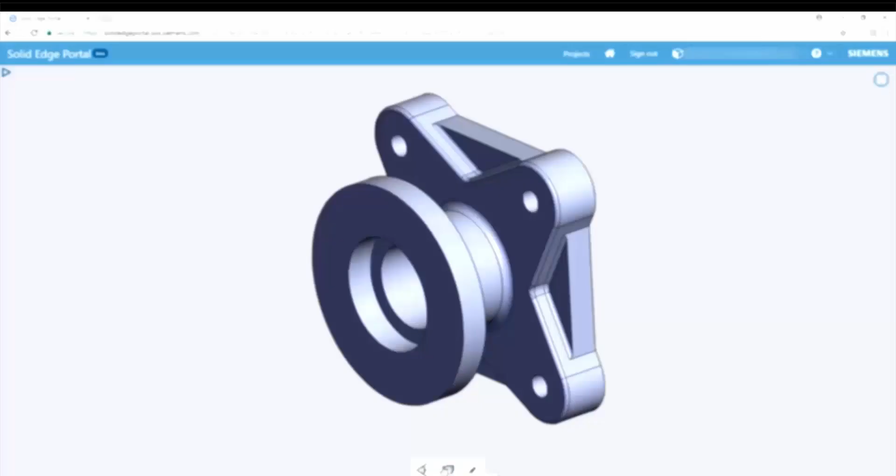Now, one of my favorite things to do with the portal is actually the capability to use multi-CAD. We can bring in files from any CAD package that we want and view them here in the portal. Now, just to show off a little bit here, we have a larger assembly, obviously. And what I want you to pay attention to is the speed of this.

Notice how fast it is to section through this assembly, how fast it is to rotate it around, and then my favorite thing, auto explode. That's just amazing, being able to explode such a large assembly so quickly and see all of those components.

Now, new with Solid Edge 2019, we have some extra electrical capabilities and extra electrical packages, so we can do things like view those PCB boards that you might design in those electrical packages here on the portal as well. We can then work with collaboration options here by giving other users the option to view and download those files if they want to, so that they can open them up in Solid Edge like we see here. Now, the portal can be basically used on any device that has internet access.

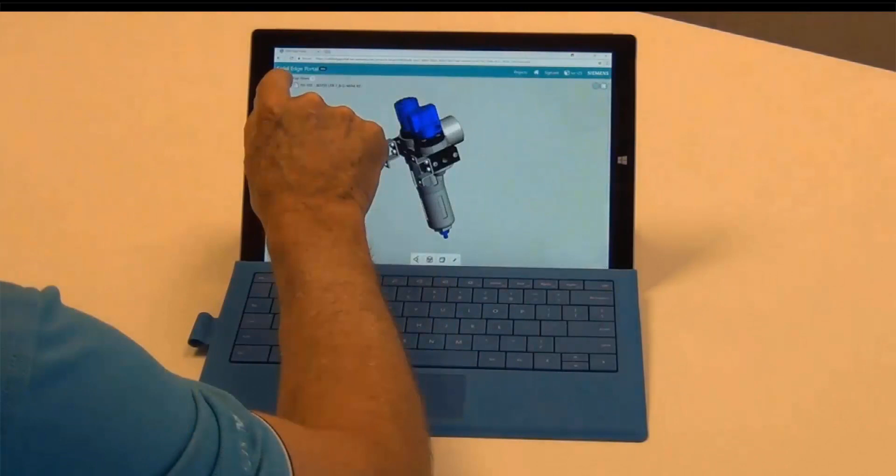So this can be done on a Surface Pro tablet like we see here with touch capability. We can go in and view those markups, or we could even do it on a cell phone. Again, anything with internet capability, we can go in and view those portal files, any assemblies, parts, drawings, markups that you might have added on there. It just really allows the non-Solid Edge user the flexibility to come in and view those files that you might have created.

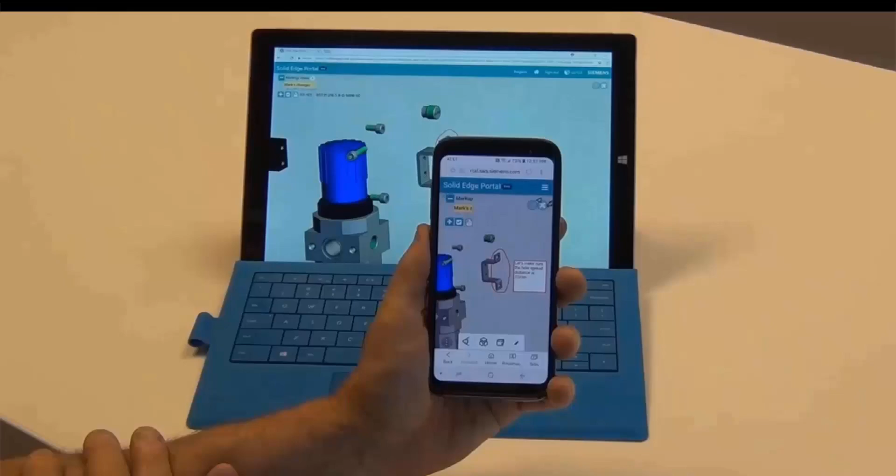So we saw how easy it is to control our drawing view updates and to facilitate any engineering change orders. We could automate our parts list by automatically adding those balloons in there as well. And then we talked about the great free collaboration tools with the Solid Edge portal.

The last thing we want to take a look at is our simulation capabilities inside of Solid Edge. We want to be able to virtually test our models to ensure that they meet our required strength. We also want to make any required changes to those files and retest them. And then at the end, we'll create an analysis report that we can share with a manager or other users if we need to. So let's go ahead and take a look at simulation.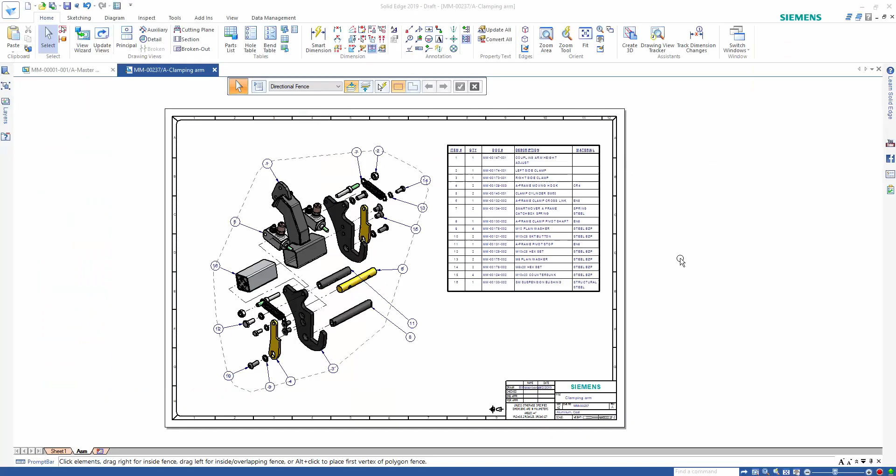We're going to switch back over to our top level assembly, and what we're going to do here to begin with is we're going to edit into the subassembly where our clamping arm is. So we'll open that guy up. And we could do a simulation on the entire assembly, but what we're focused on mainly is just this clamping arm. So what I'm going to do is isolate that component for right now, and then we can go up and switch to our simulation tab.

Now there's kind of two different ways we can run simulation, either across the ribbon on the top of the screen, or we can expand simulation over here on the edge bar and work vertically here in the edge bar. First thing we need to do though is create a new study. So we'll go ahead and do that. Now the different types of studies that we can do: linear static, normal modes, buckling, some steady state heat transfer, or even some transient heat transfer. We're going to keep it on linear static for now.

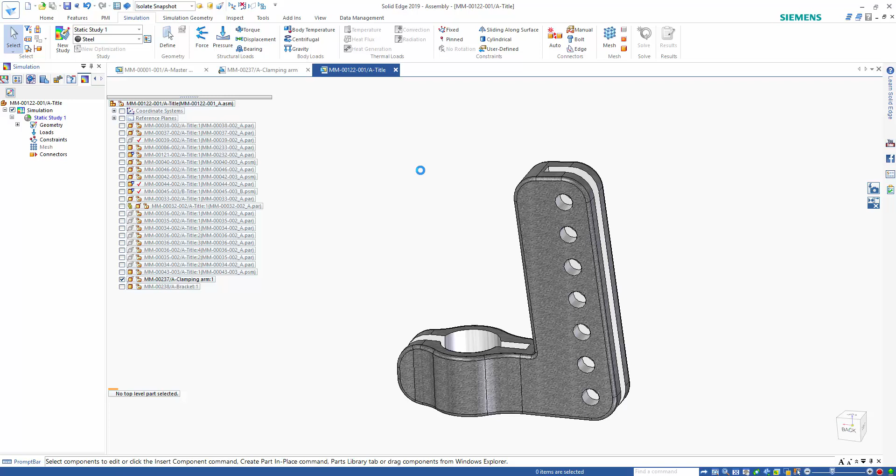And after we select our component that we want to do the simulation on, we can then start to apply our loads and constraints. So what I'm going to do is go in and apply some forces. We have some forces that will be applied here where these two holes are. So I'm going to fence select these, and again, these are the holes where the bolts are going through our model. Now, simulation runs just inside of Solid Edge, so we have a lot of the similar tools here that we've seen already, things like the steering wheel. So I can use that to change the direction of our force on those holes. We'll increase that force to something like 250 newtons as well.

Next, we're going to apply a constraint. We want to hold some portion of this model in place so that it doesn't move. So we'll simply add a cylindrical constraint down here inside of the component. And then after that, we can go in and we can mesh and solve our model. So I'm just going to do a right-click mesh here, and then that will allow us to do both a mesh and solve at the same time.

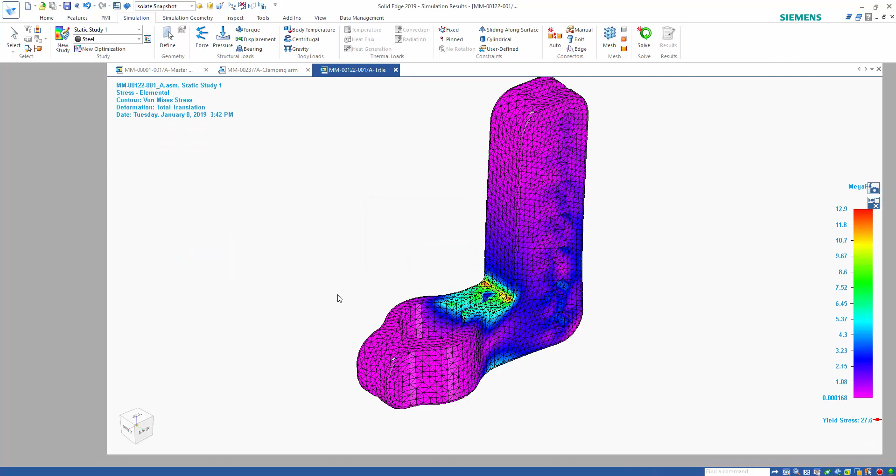You do have the options to go in if you needed to and just mesh it first and go and analyze the mesh. You can go change the size of the mesh. Maybe you need a little finer mesh around some of the holes or the rounds or radiuses, and you don't need as fine a mesh on like a big flat open area. So you could go in and edit that if you needed to. In our case, just the default mesh will work, and there we go. We can see our simulation results. So pretty quick and easy to do.

This is nice because this allows your engineers to do the simulations right here on their models as they currently design them. You don't have to waste time sending the simulation off to another simulation type engineer. Now we see our results, so we can go in and do things like animate those results. In this case, we're looking at the stress applied to it as those forces kind of bend and move that component.

Now this is exaggerated, so we can go in and do things like make the actual movement. So if you look real close, you can maybe see it move a little bit, but it's not going to deflect that much in real life. This animation can easily be saved out into a video if you wanted to do that.

We can also, though, change this and view things like displacement, or we can go in and view things like our factor of safety. So in our case, we want to focus on that, the factor of safety. Now our scale doesn't quite fit what we want to see here. So I can switch over to our color bar tab. We can define our own scale, and we want to do something like check out the factor of safety between

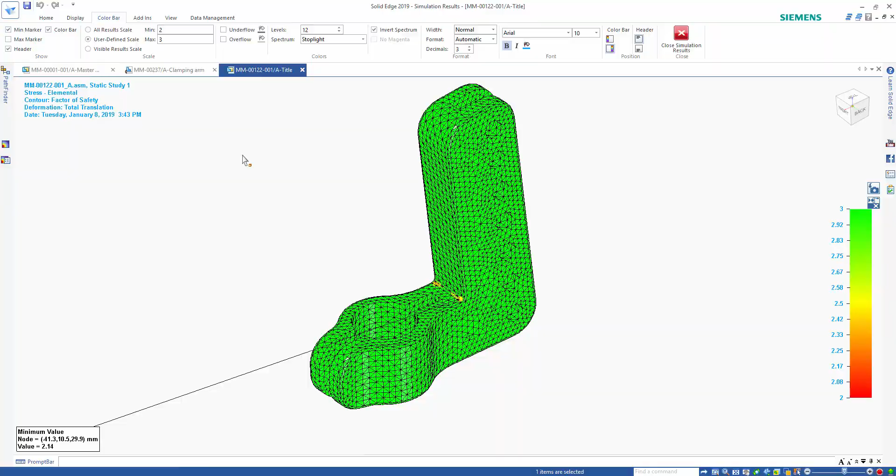2 and 3. We'd also turn on things like a minimum or maximum marker, and we can see really here on the inside of that radius that we have a factor of safety of just about 2, which isn't quite high enough for our model. We need to be about a 3 or higher for our factor of safety across the entire model. So we got to make some changes here.

So what we're going to do is close out of our simulation results for right now. We'll head back into our assembly and we're going to make some changes. Now, the nice thing again about Solid Edge is we can make those changes right here on the fly in the context of the assembly. So I can come in and simply start to grab faces, even faces from multiple parts at the same time, and then we can go in and start to make a change.

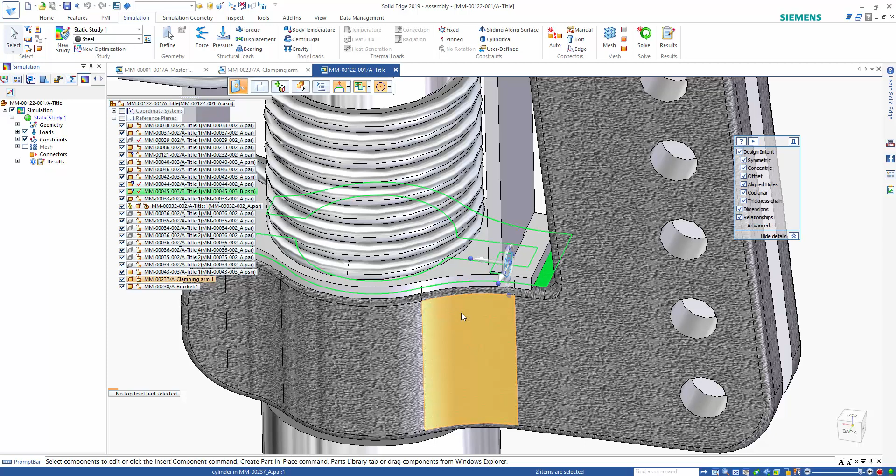Now you'll notice that we get a message here. It says some of the components are read-only and cannot be modified. So what's actually causing that is this component here has been released. So we can see that with the red check mark. We're using, again, our Solid Edge data management. That file's been released, so we can't make any changes to it.

Let's do this. Let's go see if that file is actually used anywhere. So we're going to go do a where used. And just like that, we get the results of where that part file or sheet metal document has been used. We see it's existing in the current assembly that we're inside of, and then only one draft file, which is the draft file of that sheet metal document.

So we're fine to go ahead and make a revision of this document because we know it's not used anywhere else. We won't have to go revise this in the other assemblies as well or anything like that. So we're good to go here. So I'm going to close out of our where used, and I'm going to go in now and create a revision. So we'll simply hit a new revision.

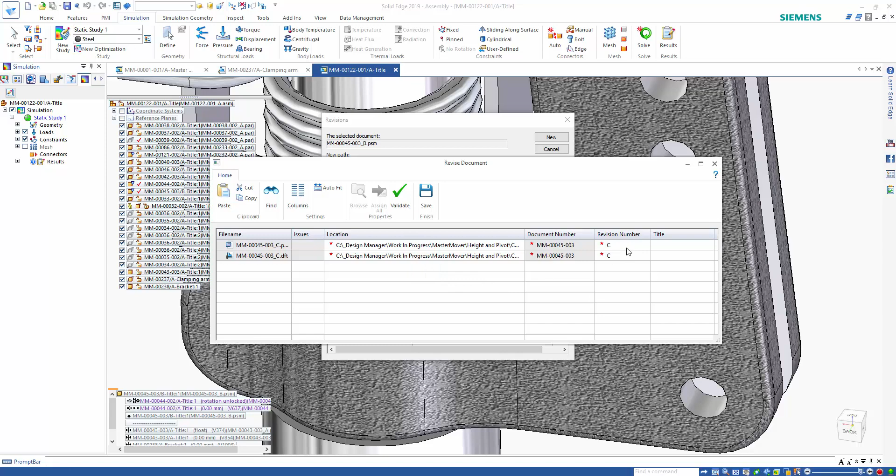That's going to bring up our data management. It allows me to give it a different name if I needed to, a revision number, but it should take care of most of that for us automatically. We can see it's going to move it over into our work in progress folder, and it gives us our revision number of C. We can then hit save, and just like that, the part is now revised, and we can make a change. So let's go back in and grab those couple faces,

and we'll start to push those up. And we just want to go up about 5 millimeters. We'll add a little bit of thickness to that. I also want to come in here and grab that inside radius, and with this one as well, we'll also just change that to 5 millimeters. So we've made our changes.

Let's head back into our simulation here. So we'll isolate this component one more time, and what we're going to do is we're going to go back into our study, and we're going to solve it again. So this will take into account now those changes that we made. So it may need to do a little bit of remeshing, but then it'll go back in and solve that analysis again, applying that load that we put on those 2 bolt holes and our fixed cylindrical constraint as well.

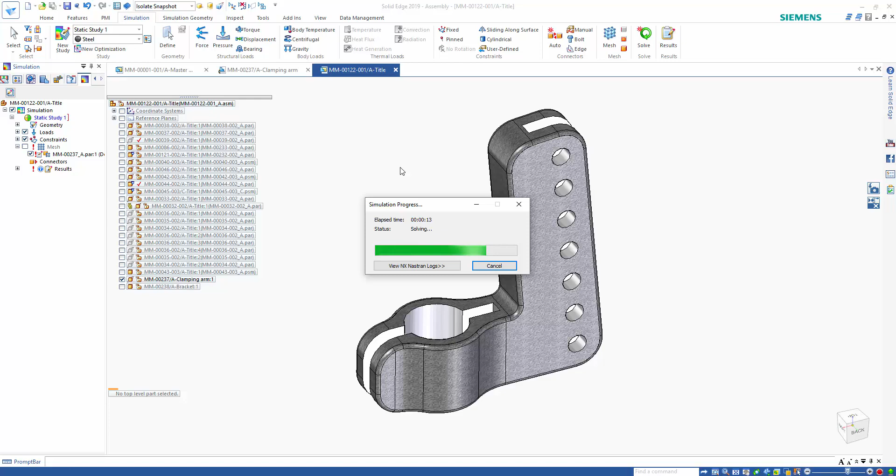So now we can see our results. Again, we can see our von Mises stress to begin with, but we can go in and easily change that. And what we care about, like I said before, is the factor of safety. We'll do a custom scale again between 2 and 3.

And we don't see any more yellow down there. So that means our factor of safety goal has been met and we're good to go. So I'm going to switch this back for now to our stress. And what we can then do is create a report of this. Maybe we will need to share this report with some other engineers or a manager or something like that. So I can quickly create a report, give this a name, add an introduction statement or a conclusion to this as well. Then we can save it down as an HTML document or a Word document.

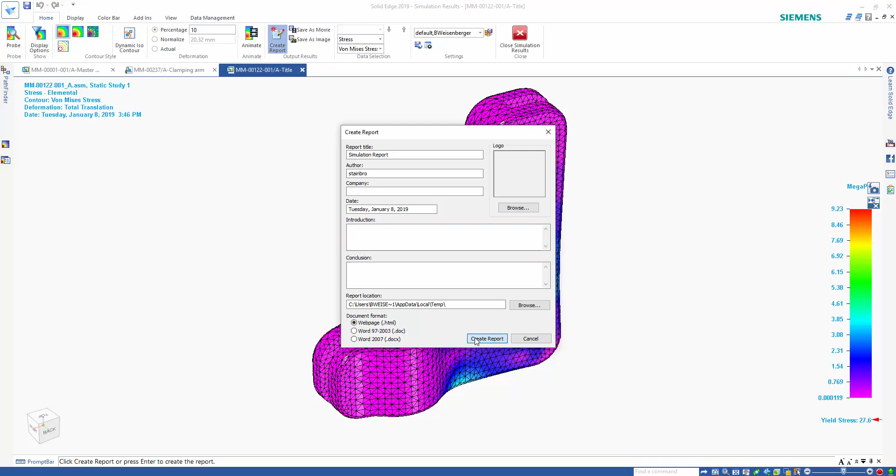We'll hit create report. It'll go through and grab some different screenshots for us, grab some different values and put it all in a nice study or report for us here. So we can see things like the study properties. We can see what material has been applied to it, the yield stress properties of that material, what loads and constraints were applied. And then down here we see different screenshots of the different stresses or displacement values that would actually happen on our model. So a really, really nice report that gets created for us automatically from within Solid Edge Simulation.

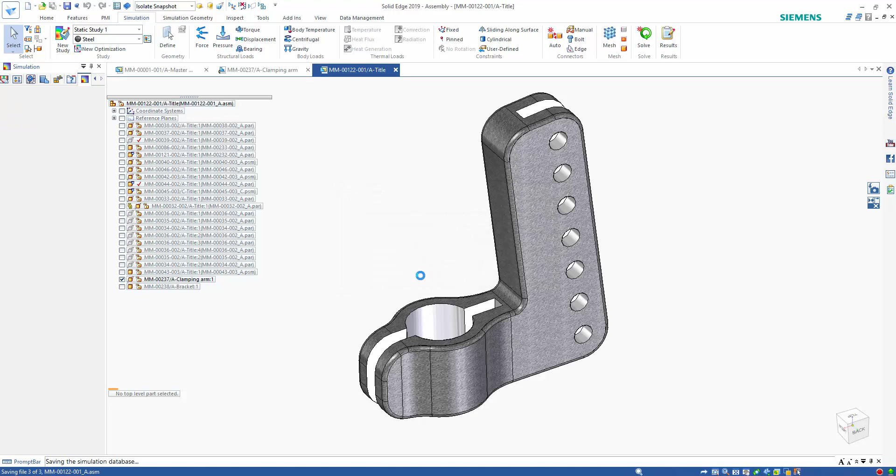So that takes care of our simulation aspect of this. So what we're going to do now is close out of this and actually head over into our drawing. We've made some changes to this part document, right? We added some height to it. We changed that radius value. So we want to go reflect those changes on our drawing. This is going to take a second to save just because we're also going to save those simulation results to that part file as well. We'll jump over here then to the drawing.

And if we go back to our main sheet where we had that view of that clamping arm, we can see there's a gray box around the views, and that indicates that the views are out of date. We can simply hit update views. That'll update all our views, and then what we have here is a tool that'll help us track any changes that have happened in the drawing. Now we can see the center line moved. We don't really care about that, so we're just going to get rid of that one. But we see that we have two other dimensions that changed. So let's go find them. That allows us to zoom in and see where those are at. We can copy them if we want to as well.

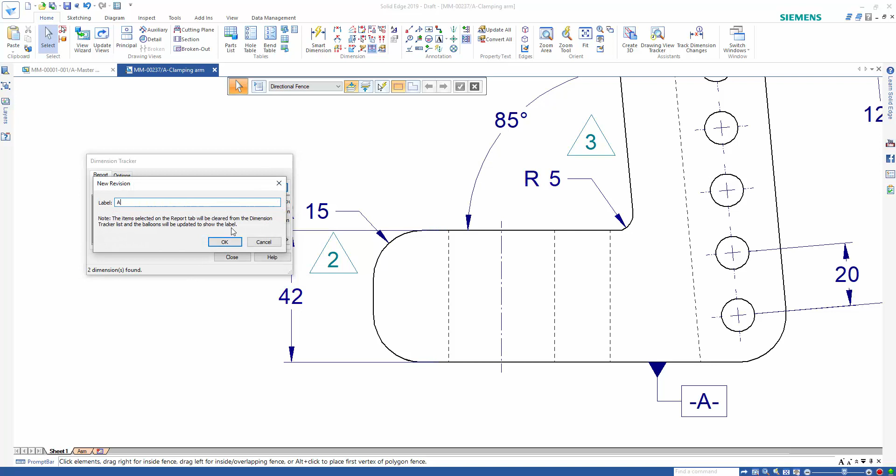And we're actually going to change the revision. These are going to be revision A. So instead of being labeled 2 and 3, they're both revision A, which allows me to then come up here into a revision table. This is an embedded Word document, which you could do inside of Solid Edge. To edit this, we simply double click it, and now I have access to the document as if I was inside of Word. I can come in then and paste those values and give it our revision name. Just like that, we've updated our revision table, added all that relevant information that we need in there for what dimensions changed during that revision, and our drawing has been updated.

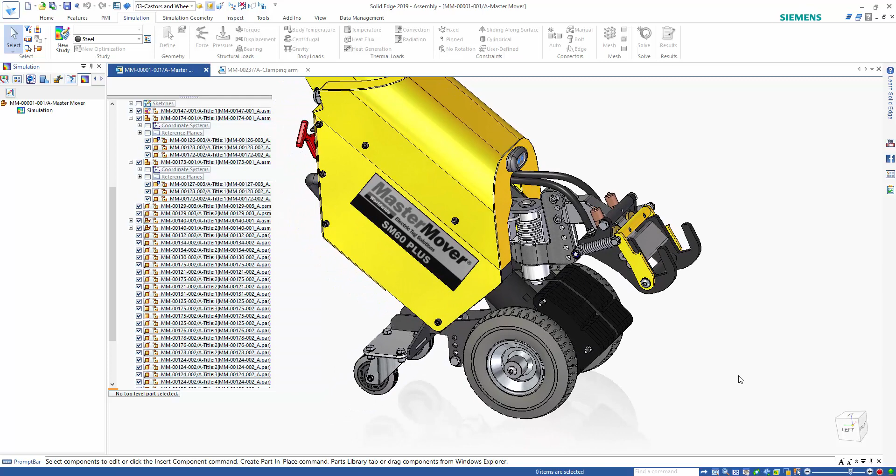So there we go. We created our master mover. We went and created that clamping arm. We brought in some other components, DWGs, things like that. We assembled the components, made changes to them here in the context of assembly. Also did a little bit of simulation on the parts as well to ensure the fit and functionality and assure it meets our standards. So with our simulation, obviously it's integrated into Solid Edge, so it makes it much easier for the designers to use. That allows us to reduce our physical prototype costs and material costs as well. And this is all done using the industry-proven technologies of FEMAP and Nastran.